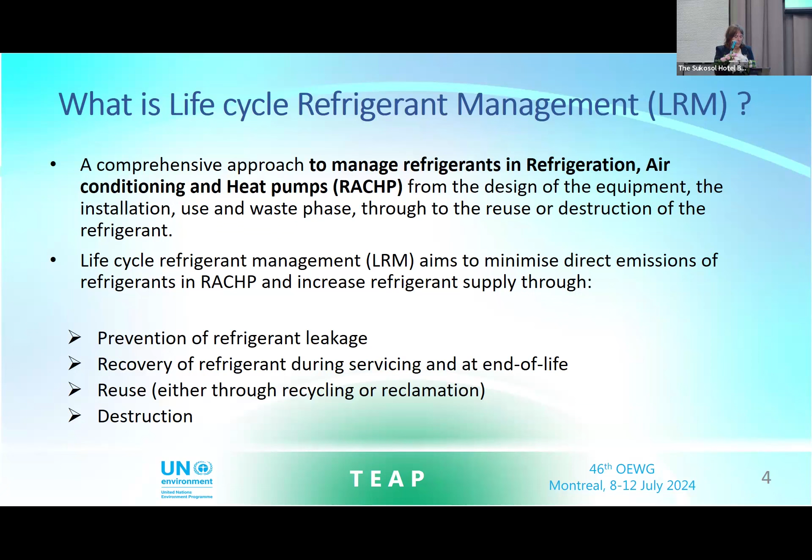through 4 sets of measures. First of all, the prevention of refrigerant leakage. Secondly, the recovery of refrigerant during servicing and end of life. Thirdly, the reuse, either through recycling or reclamation. And finally, destruction. So let me take you through these 4 topics one by one.

Leak prevention first. Leak prevention focuses on the measures to avoid refrigerant loss during the whole RAC HP life cycle, which of course has climate, ozone, and other environmental, health and safety benefits. It also provides energy savings by maintaining the performance of the RAC HP equipment. Leak prevention requires a variety of preventive actions already during the original design of the equipment, the manufacturing process, the transport, storage, installation, use, and end-of-life treatment.

There are a lot of international standards and other guidelines, including national ones, that provide recommendations in this regard, and you can find several of them in the report. Examples are standards that identify the selection of suitable materials, such as components, joints, and packaging, training requirements, and also tightness inspections to verify that the refrigerant indeed is not leaking.

And for tightness inspections in particular, there are two major groups of methods that are being used in the market. The direct methods, as we call them, these are by use of sensors or substances like UV dyes or acoustic cameras. And indirect methods, they are focusing on analyzing the performance parameters of the RACHP equipment, such as the pressure or the temperature, for example.

Leak tightness inspection has to be achieved through comprehensive training of the technicians, of course, the accessibility to those leak detection equipment, and policies that promote this regular inspection and repair. Leak detection technologies are available, but the report identified that they are not always accessible in Article 5 parties, and examples of supporting policies are provided in Chapter 5.

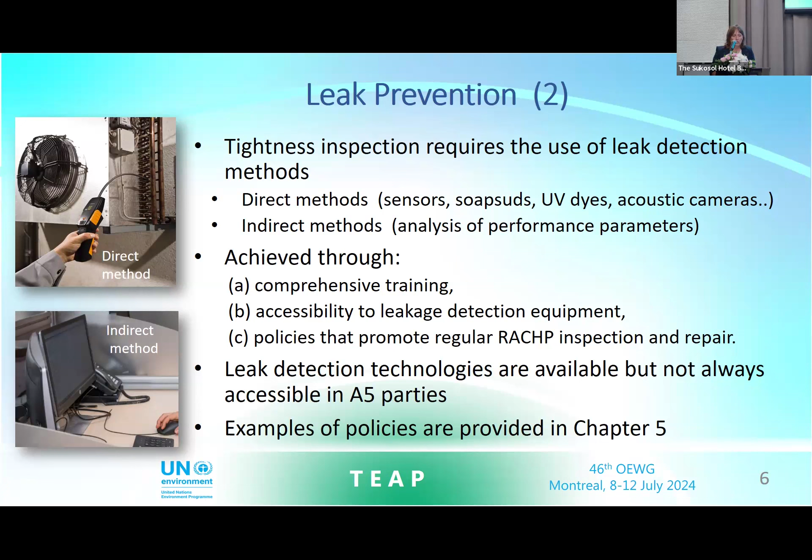Focusing on refrigerant recovery, I think all of you in the room know this very well. It refers to the recovery of the refrigerant from the RACHP equipment, also from refrigerant cylinders, during the servicing or the disposal. There are off-the-shelf recovery tools. I think some of them are promoted here in the room. There are also custom-made recovery technologies that are available, but again, not always accessible in Article 5 parties.

Refrigerant recovery is, of course, essential. Otherwise, recycling, reclamation, or destruction could not take place. But it remains low in both Article 5 and non-Article 5 parties. It really requires a change in behavior to stop venting to the atmosphere through comprehensive and continued technician training, access to refrigerant recovery machines, establishing also a logistic reverse supply chain with sufficient access to refrigerant recovery cylinders and tanks. That should really not be underestimated. There's a need for sufficient technician time to complete the recovery and financial mechanisms to support this responsible recovery.

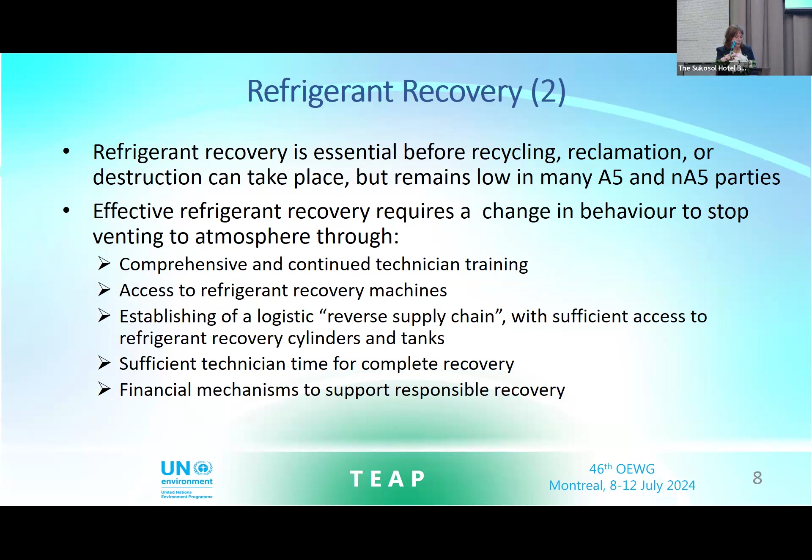Refrigerant that is recovered can further be reused by either recycling or reclamation. And to determine whether a recovered refrigerant can be reused and where, it may be necessary to conduct a chemical analysis to know its composition. But in some cases, the reuse may occur immediately without prior treatment. Refrigerant reuse is very interesting as it does not count to Montreal Protocol consumption targets and therefore can contribute to compliance. Both recycling and reclamation support the circular economy by reducing the need to produce new refrigerants.

And incentives for recovery and reuse are highly sensitive to the size and accessibility of the bank of refrigerant in RACHP systems, the regulatory environment, availability of alternative technologies, and to the price of virgin refrigerants. In particular, if you have a phase-out or phase-down regime that creates a shortage of refrigerant and leads to price increases, then refrigerant recovery and reuse may increase because it's economically more interesting. However, if the supply of newly produced or virgin refrigerant remains plentiful, then the reused refrigerant may be non-competitive and other policy and economic measures may be required to incentivize LRM.

What is refrigerant recycling and how is it different from refrigerant reclamation? Refrigerant recycling is a basic cleaning process such as filtering and drying. It often occurs on site and is most suitable for single component refrigerants. And in the picture, you see an example of a recycling machine for 134a in the car industry.

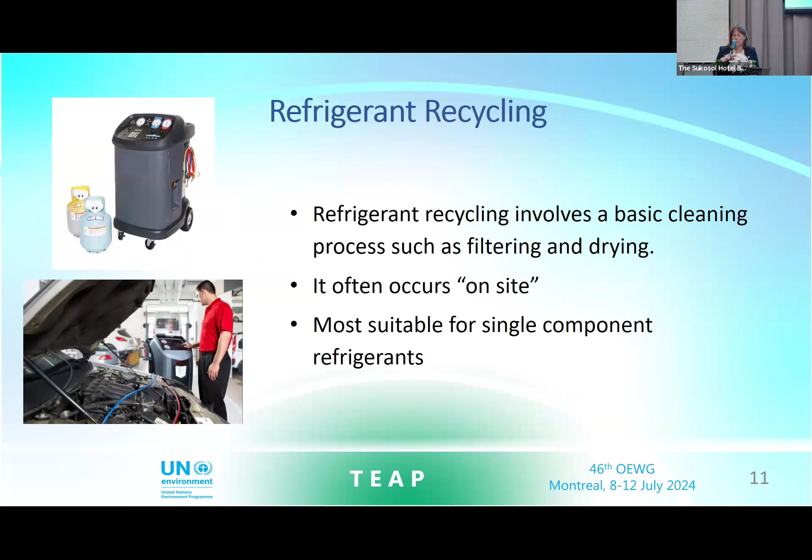It was mentioned already this morning, some recovered refrigerants need to be destroyed because they may be highly contaminated or there's no further market need. The Montreal Protocol has established a list of approved destruction methodologies. This is mainly for the purpose of production data reporting. It was found that there is actually adequate global capacity for destruction, but it is unevenly distributed between non-Article 5 and Article 5 parties, and even between Article 5 parties. It can be anticipated that destruction technology may further improve in cost, scalability, mobility, and efficiency.

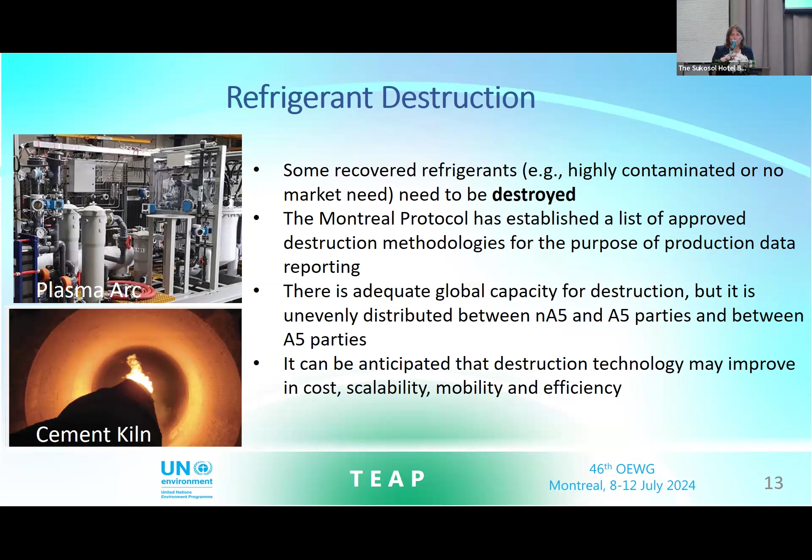Then a few words on the costs of LRM. It requires substantial investment for the acquisition and operation of leak detection, recovery, recycling, reclamation, and destruction. It depends on the type of refrigerant, the scale of the operation, regional regulations, the technology used, and the fate of the recovered refrigerant. Will it be reused or will it be destroyed?

Recovery and recycling is relatively simple and dispersed over many places. To be effective, you need, though, a large amount of recovery and recycling equipment. Equipment for destruction and reclamation is more sophisticated. It can be capital intensive and is more centralized. Costs include capital, variable costs, such as labor, and opportunity costs.

For example, an installer may gain more money if he goes to install a new RACHP equipment rather than spend his time on recovery of a refrigerant. And that's what we call the opportunity cost. Is it really opportune for him to do that work or not? Variable costs are determined by the volumes of the refrigerant being recovered and reused.

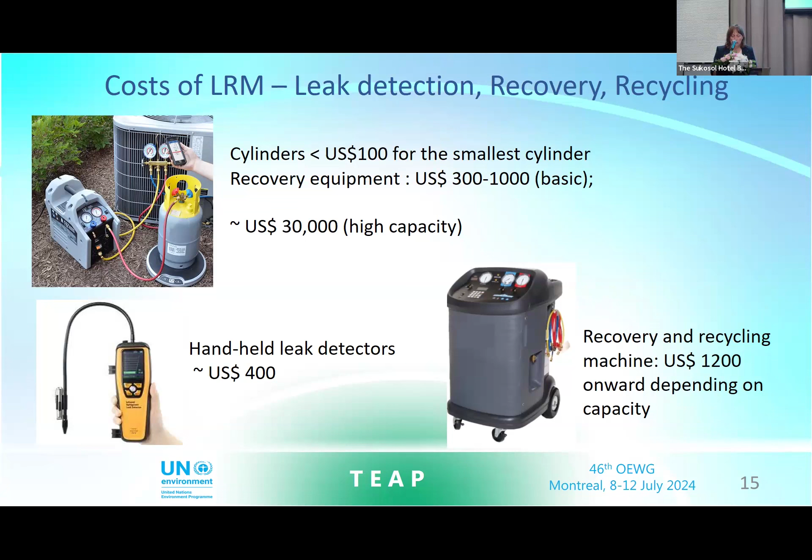Recovery equipment between 300 and 1,000 for basic recovery equipment. But if you go to higher capacity, it can be up to $30,000. Handheld leak detectors, about 400 was the indication. Recovery and recycling machines, 1,200, but depending on the capacity, it could also go up. Refrigerant identifiers, I think some of them are also featured here in the room, between 1,000 and 5,000 US.

Gas chromatography, which is a very expensive solution, was indicated at 45,000. Some parties said it's much more in their country. And reclamation units could be from $5,000 onwards, also again, depending on the capacity. Retrofitting existing hazardous waste facilities, such as the rotary kilns, which was mentioned this morning, can be a cost between $50,000 and $100,000. A new dedicated facility, like a small rotary kiln, $3 million. Commercial plasma arc facilities, $4.2 million.

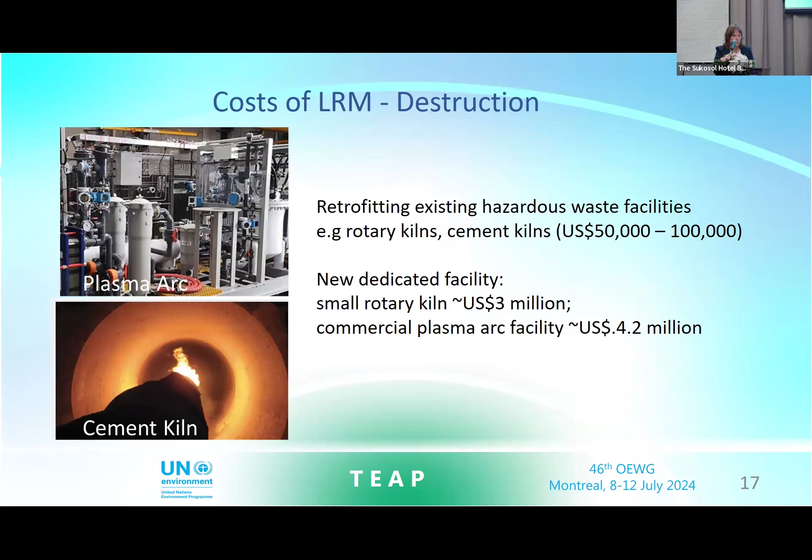A few words on policies and programs. Both mandatory and voluntary LRM policies and programs are currently implemented in many parties already. Many lessons have been learned from the varying success of these policies and programs. It has been identified that policy enforcement is challenging due to the large volume of end users, distributors, and independent contractors that are involved. Effective LRM requires stakeholder support, particularly when developing reverse supply chain infrastructure and technician training.

Voluntary actions, compliance, offset generation, incentivization, and corporate citizenship programs can also be very helpful. And the safe handling and transportation of refrigerants must also be considered, in particular when we are moving more to flammable refrigerants in the future.

Article 5 parties, and especially low volume consuming parties, lack or have inadequate LRM infrastructure. And we are talking here again about leak detection equipment, recovery and recycling equipment, and the associated tools, the access to reclamation and destruction units, analysis laboratories, expertise, and logistics to effectively manage the reused refrigerants.

While some larger industrial Article 5 parties may have more developed infrastructure, they often also require upgrades or replacements for their existing tools and equipment to improve LRM. And significant benefits could arise from Article 5 parties working together. It was also mentioned this morning, the regional cooperation to set up capital-intensive integrated reclamation and destruction infrastructure.

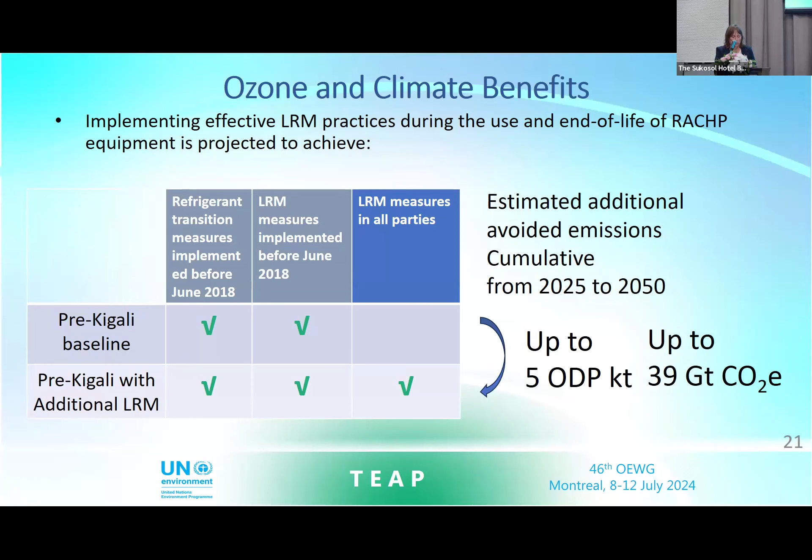So in conclusions, for the report, technologies were found to be available for LRM, but not accessible in all Article 5 parties. There are policy, economic, and accessibility obstacles and challenges associated with effective LRM. And it was also found that if you have a phase-out or phase-down regime that creates a shortage of refrigerant and leads to price increases, then refrigerant recovery may increase. However, if that's not the case, you will need other policy and economic measures to support LRM.

Both mandatory and voluntary policies and programs were currently implemented in many parties already with varying levels of effectiveness. It was also found that establishing a data collection system by parties could inform their decision-making for optimal LRM strategies. And it was not possible in the time frame of the report to make a more deep cost-effectiveness analysis of LRM.

LRM practices can be a key component of refrigerant emission reductions. I think that's also quite well known to you. It can achieve emission reductions beyond those from strictly Kigali compliance. It may be even the key tool for some parties to achieve Kigali compliance. The TEAP will continue to follow these issues and its potential emission reduction opportunities. And with that, I thank you for your attention.

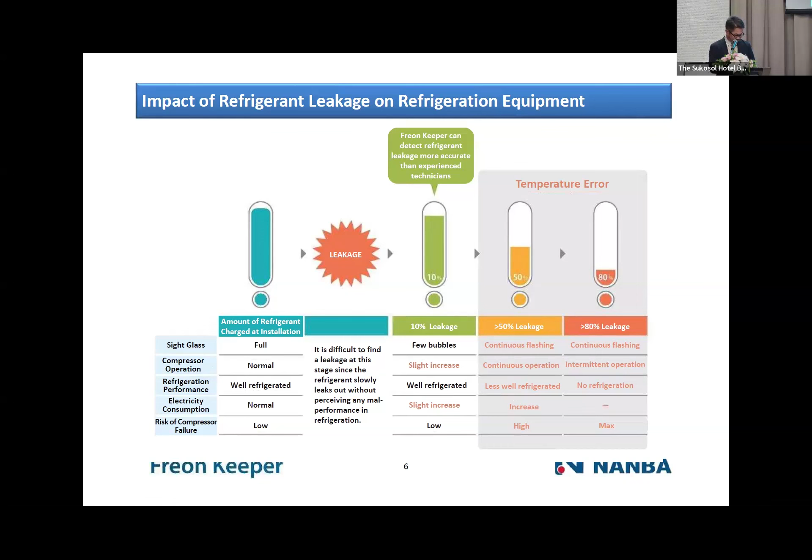This slide explains how the Freon Keeper detects refrigerant leaks. When the amount of fluorocarbon refrigerant is reduced, refrigerant gas cannot be fully turned into liquid status due to poor condensation in the cycle. This remaining gas is called flash gas. This photo shows a sight glass attached to the refrigerator, which is an inspection window to visually check the flash gas.

Picture A is when the optimal amount of fluorocarbon refrigerant is filled. No flash gas is observed because fully liquid refrigerant is passing through the sight glass. Photo B is when a small leakage has occurred, so a drop of bubbles can be seen. Finally, picture C is when more than 50% of the refrigerant is leaking, and you can see many bubbles forming.

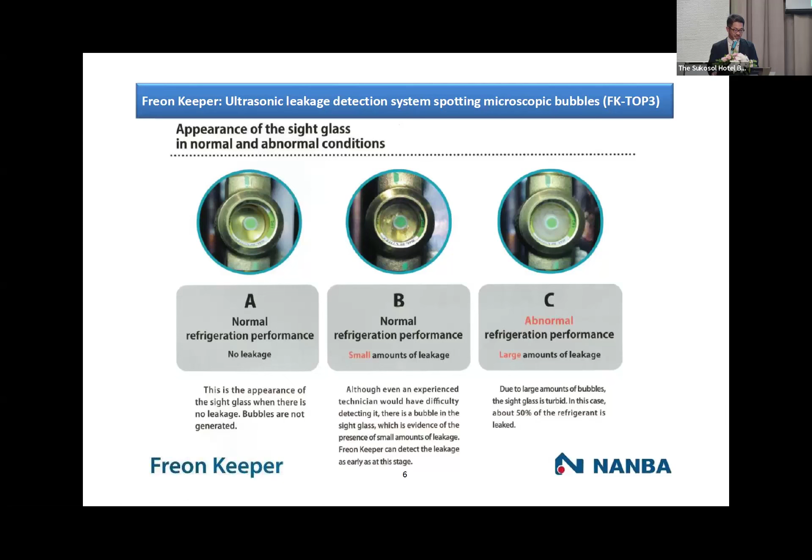Freon Keeper has three benefits. The first one is cost reduction. Freon Keeper can significantly reduce power consumption and the recharge cost of refrigerant.

The second is to reduce fluorocarbon refrigerant leakage. This means Freon Keeper contributes to mitigating global warming by preventing the emission of fluorocarbons, which have a high global warming potential.

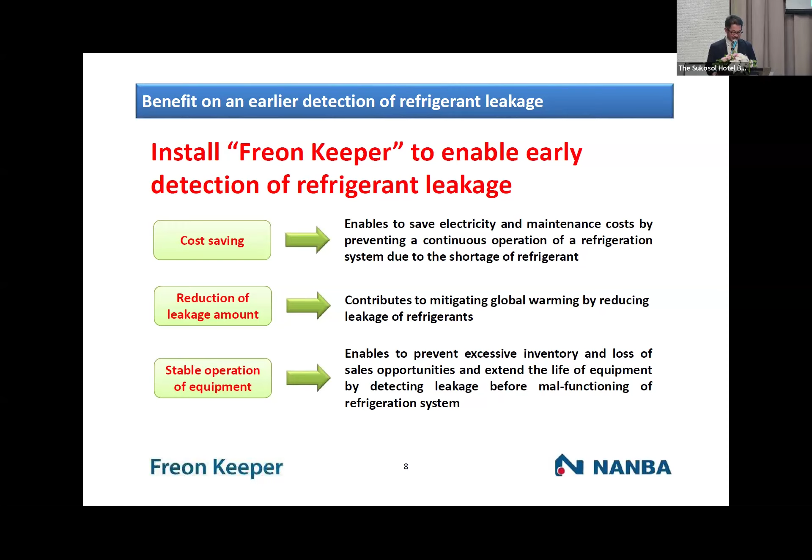Freon Keeper turns refrigeration equipment into IoT. Various sensors are installed in the equipment, and operational cost and operational data is sent to the server using Wi-Fi. Data from the server can be checked on PCs around the world, allowing centralized management of equipment at each location.

Freon Keeper can determine refrigerant leakage based...

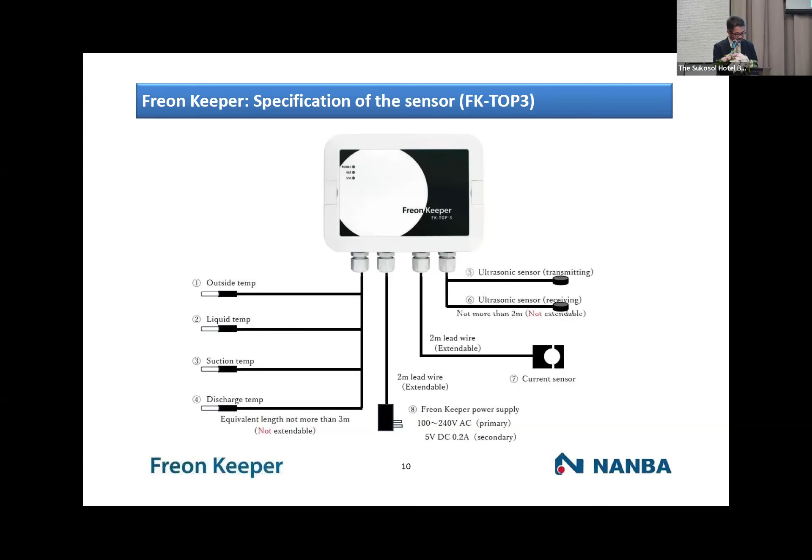In 2018, NANBA carried out the installation test of Freon Keeper in Malaysia with the support of NEDO of Japan. So I'd like to introduce the test result briefly.

In this case, Freon Keeper was installed on a chiller system for air conditioning in a shopping mall in Malaysia. Three chillers were installed, and two of them, number 1 and number 3, were in operation. Each chiller had three compressors.

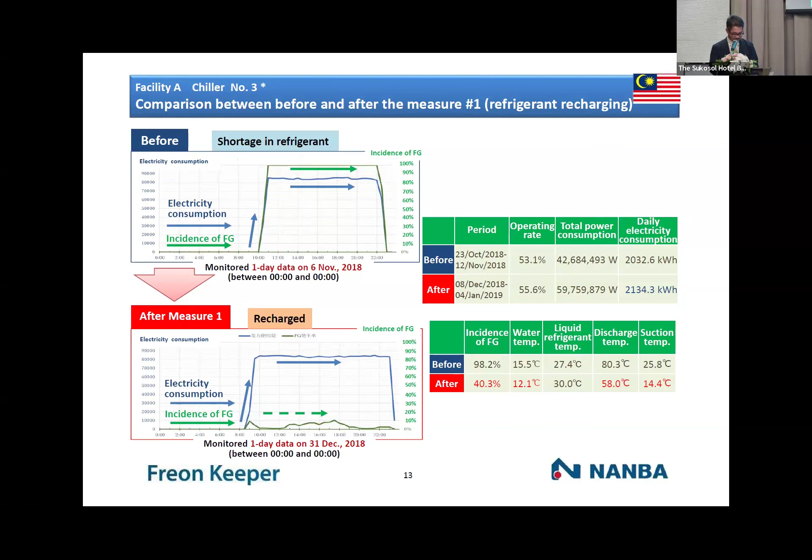Also, the flash gas generation rate was not zero, which means the amount of refrigerant was not enough. Therefore, it was decided to take a second measure to reduce the number of operated compressors from 3 to 2. The result is shown in the lower graph.

The flash gas rate further settled down. In the data, the flash gas generation rate was reduced from 40% to 4%, and the electricity consumption was lowered from 2,130 to 1,300 kilowatt-hour. Moreover, the water temperature increased only 1 degree.

Compared to before the installation of the Freon Keeper, the capacity has increased and the amount of electricity has decreased. In addition, the amount of refrigerant was close to adequate by operating two compressors as a result.

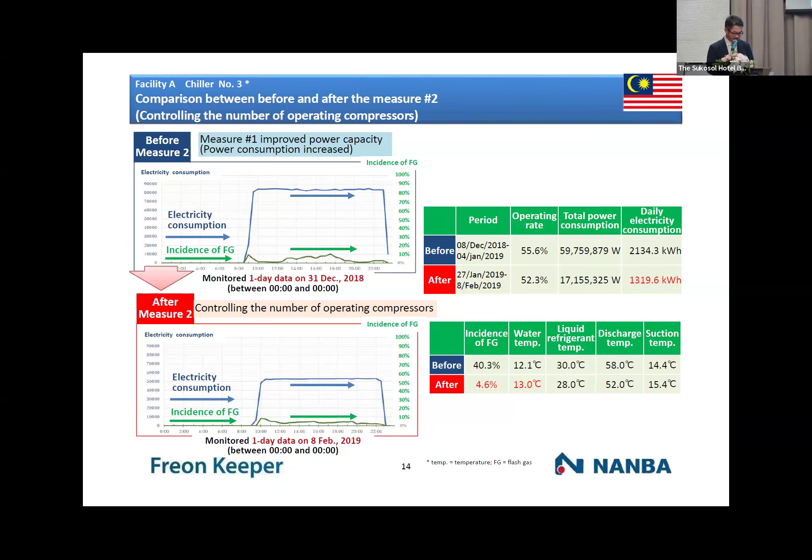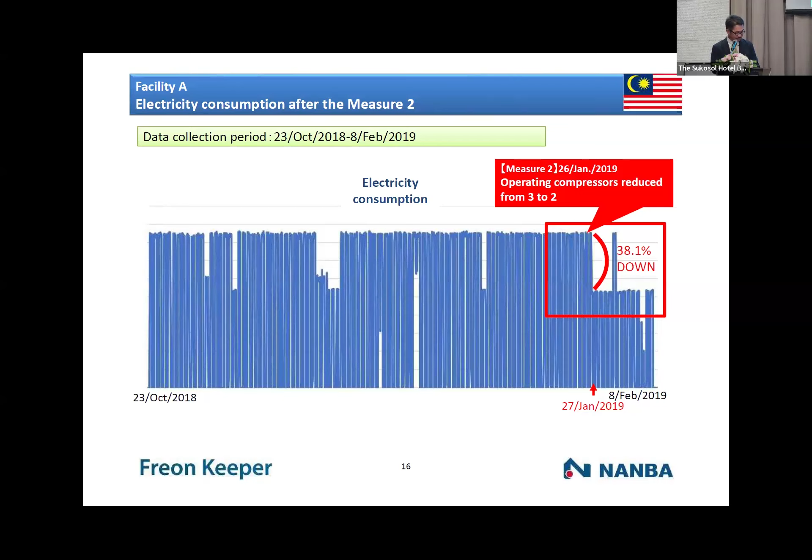Here's a graph of electricity consumption for the same period. A red box indicates the result of second measures, which shows 38% reduction in electricity. In conclusion, the water temperature in number 3 chiller, where measures were taken, fell from 15.5 degrees to 13 degrees. Even in number 1, where no measures were taken, the water temperature dropped from 15.7 degrees to 13.7 degrees consequently. As a result, the amount of electricity used in number 3 chiller was reduced by 38%.

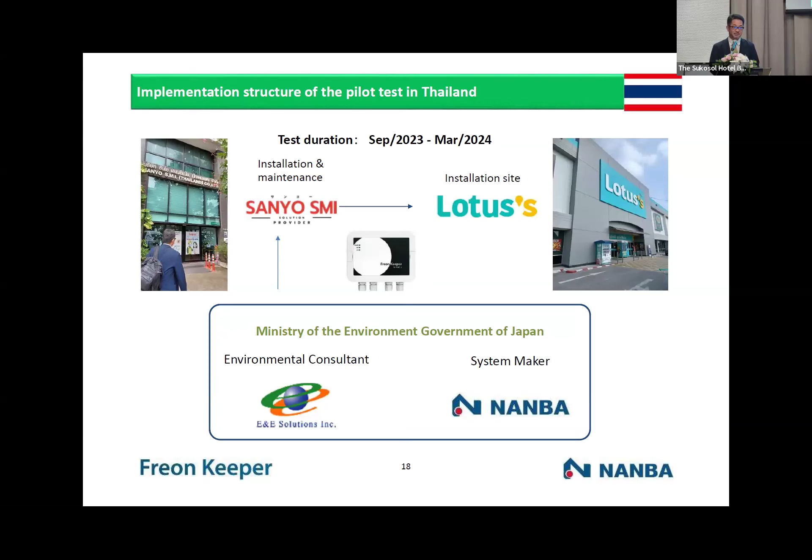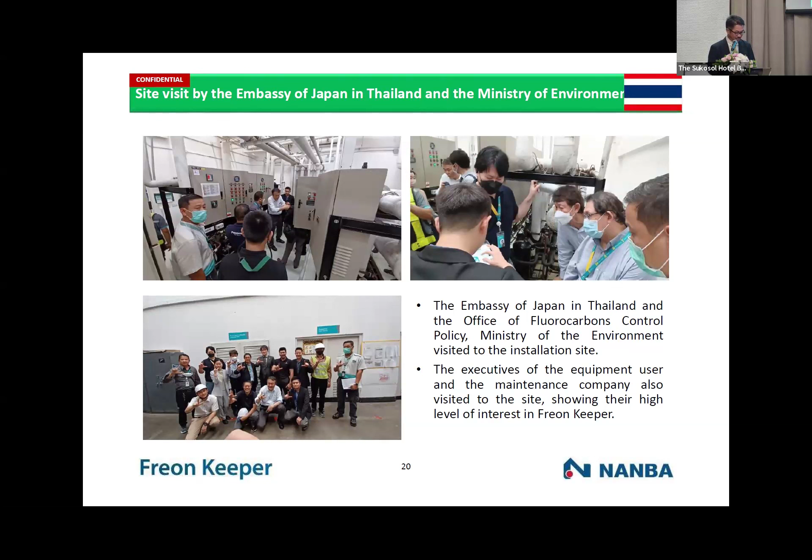This shows when the Japanese embassy in Thailand and the MOE's Fluorocarbon Control Policy Office visited the installation site. The executives of the equipment users and the maintenance company also visited the site. And they showed a high level of interest in Freon Keepers.

However, the users and maintenance companies have highly appreciated how Freon Keeper can effectively provide data on the operating conditions and malfunction of the refrigeration unit. Moreover, the test reveals the high level of Sanyo SMI's technical capabilities.

In summary, first of all, the increased electricity due to fluorocarbon refrigerant leakage is not well recognized, but its energy reduction effect is very significant. Secondly, it is too late to repair the equipment after it has stopped cooling. Maintaining the proper amount of refrigerant can extend the life of the equipment instead of being messed up by unexpected repairs. Repairs are easily scheduled and prevent inventory losses and lost selling opportunities.

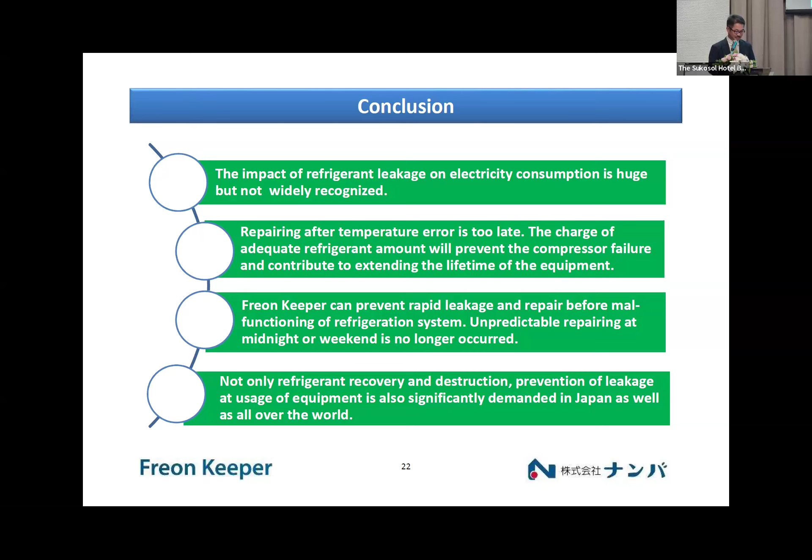Finally, from the viewpoint of climate change, preventing leakage of fluorocarbon refrigerant during use of equipment should be seriously addressed, taking into account its significant reduction effect. Okay. Thank you very much.

That was fantastic. Thank you very much. Very interesting presentation. Great country examples. Hopefully we'll have a chance to have a little bit of discussion about this at the conclusion of the presentations. But without further ado, I would like to invite up Mr. Akira Mizuhara and Mr. Hirotaka Hata, or whichever one of you is giving the presentation, on technologies for reclamation of used refrigerants. Thank you very much.

Nice to meet you, everyone. My name is Hata from MZ Company Limited, a Japanese company. I'm going to talk about technologies for reclamation of used refrigerants.

The first topic is which refrigerant is suitable for reclamation. Refrigerant recovered from cooling equipment can be reclaimed by achieving the same quality as new refrigerant and refilling other refrigerators, air conditioners, and other equipment. Oil and moisture mixed in refrigerant are removed after reclaiming. Different refrigerants are difficult to separate and extract, and if a significant amount is mixed, the refrigerant must be discarded.

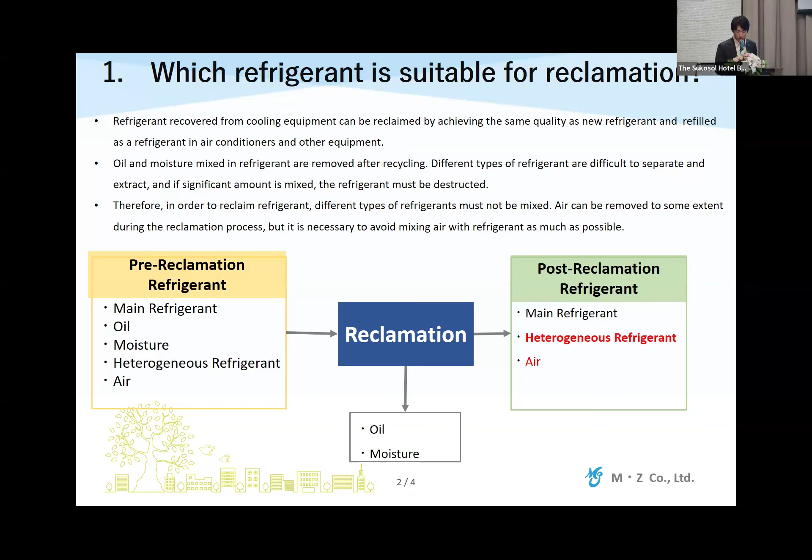Therefore, in order to reclaim refrigerant, different types of refrigerant must not be mixed. Air can be removed to some extent during the reclamation process, but it is necessary to avoid mixing air with refrigerant as much as possible.

The second topic is what to do before recovering refrigerant. A very important point: before recovering the refrigerant, the recovery cylinder must be sufficiently vacuumed. It is also necessary to self-clean the recovery machine and completely discharge the refrigerant remaining in the condenser inside the recovery machine. Also, this is usually done when the previous recovery operation is completed.

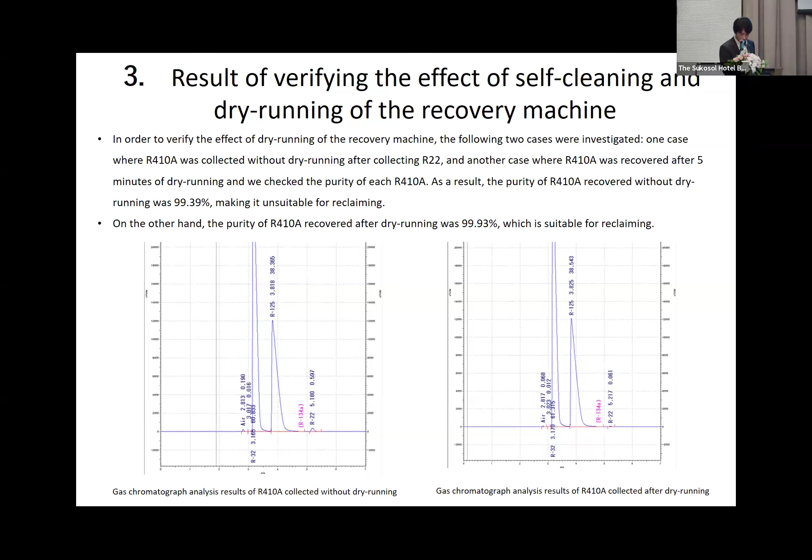The last topic is an explanation of how to reclaim refrigerant. Introduced is the method of reclaiming refrigerant the MZ group is doing in Japan. Refrigerant for reclamation is recovered in a cylinder of about 120 liters and reclaimed.

First of all, refrigerant is liquid in the cylinder and evaporated when heated. Next, the oil mist contained in the gas is removed by the oil absorbent. Then moisture and acid are removed by moisture absorbent and acid absorbent.

Last, the refrigerant gas from which impurities have been removed is cooled and liquefied to become recovered refrigerant. Detailed information is on display, so please come to take a look.

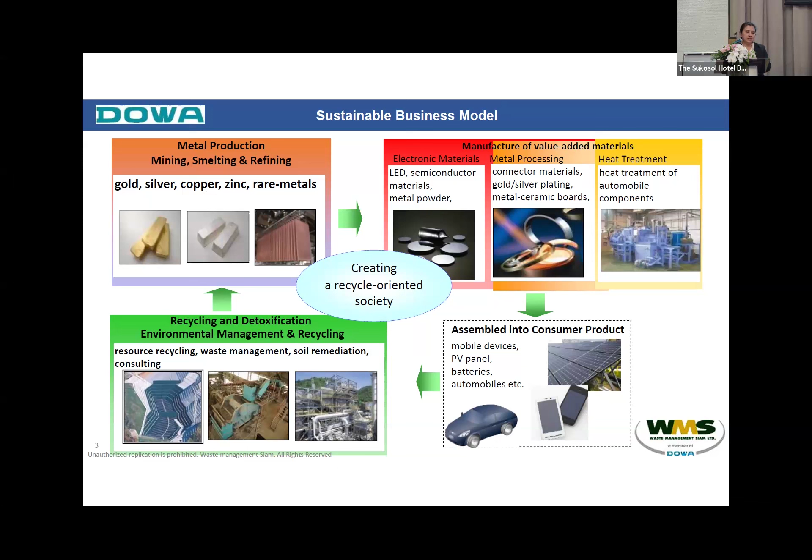Then, for the end of life, we also have our company, DOWA Eco-System, that does recycling, and we have waste disposal for things that cannot be recycled anymore, and a soil remediation business as well. Our company has a global environmental mining and recycling business in more than 80 countries for both DOWA Eco-System and E&E Solutions.

Thailand has much more than other countries. Some other countries have only 1 facility, but in Thailand we have 4 companies and 5 facilities. DOWA Eco-System has 4 core businesses: recycling, waste management, soil remediation, and we also run our own fleet, a domestic logistics company, so we can control the quality of transportation and serve the customer the best.

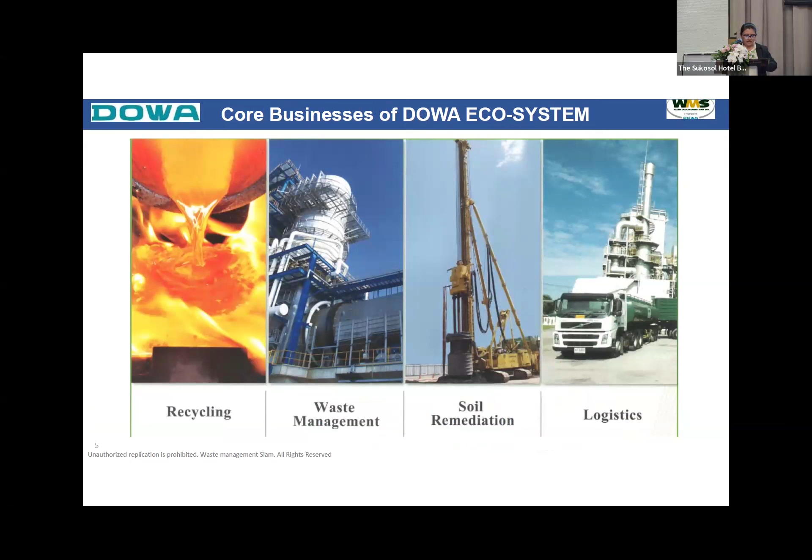Here, let me introduce the Thailand operation under the Waste Management Siam facility in Thailand. First, here we see the Bangpoo Environmental Complex. This is the incineration that can burn both hazardous and non-hazardous solid, liquid, and also gas waste. We also produce steam that we can sell to other factories nearby, and we can also produce electricity with steam turbine generation as well.

And we have another incinerator, a furnace that we installed later for the pre-treatment of batteries before we segregate the metal and precious metal, which we can send back to Japan for recycling. That's for lithium batteries and nickel metal hydride batteries for hybrid and also EV vehicles.

And we have the SBEC. SBEC here is the landfill. We have a secure landfill. For the landfill, we treat only non-hazardous, but we can also treat hazardous waste as alternative raw material for the cement kiln. And we have the wastewater treatment plant, and we also do the WEEE dismantling project in our facility in Chonburi.

And we also have transfer stations all over Thailand, because our customers are located from the north to the south of Thailand. Because of that, we run our own transportation to make sure that we can control the quality of the service to our customers.

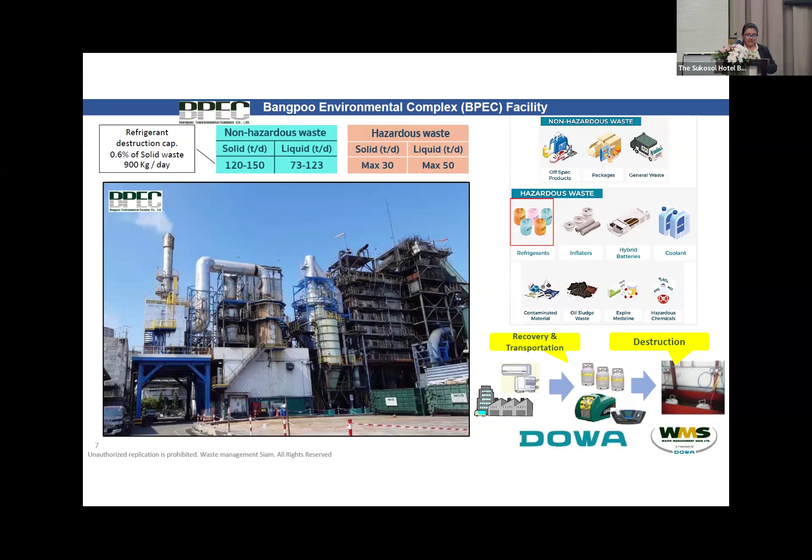For the technology of the main furnace, we use fluidized bed technology, because we can save energy with it, and we feed the refrigerant and the gas waste into the main furnace together with the hazardous and non-hazardous waste. Then we have the full flue gas treatment system. And at the end of the pipe by the stack, we have a 24-hour monitoring system connected with the Industrial Estate Authority of Thailand, so they can monitor our flue gas treatment system.

In Thailand, I can say that BPEC is the one and only facility that can treat gas waste and check the destruction removal efficiency. Before we got the permit, we had to do a trial, and for the trial, we had to destroy more than 99.99% of the refrigerant. So we are the only one that can make sure every customer that sends their refrigerant to us can have the certification, and we can check the quality of the gas treatment, that we treat 99.99%.

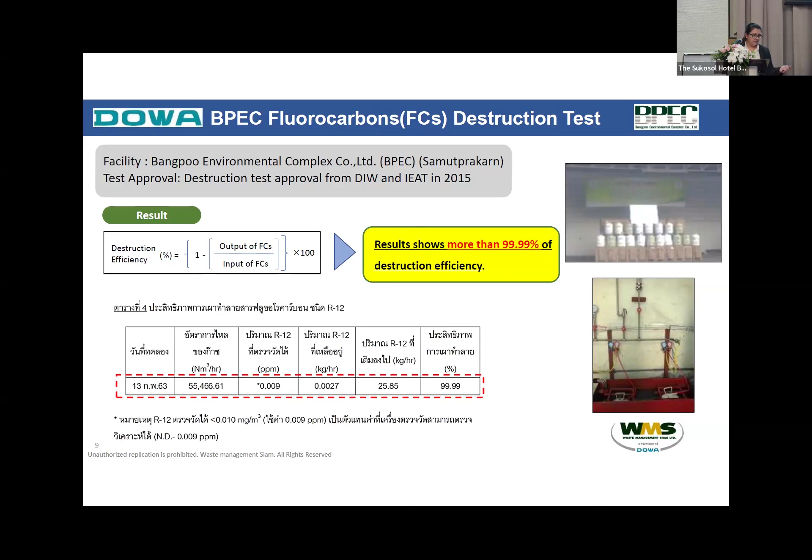And this is the way that we do it. We have both factory and non-factory. Actually, most of the factories that have refrigerant are our customers already. Then we have the recovery. We do not do the recovery ourselves. We have a partner that does the recovery at our customer's factory, and then we have our own fleet transportation to bring that gas waste to our site, and we do the destruction here at BPEC. Currently we can treat more than 100 tons per year as of last year.

Apart from that, we also have some other activities. We do recovery technique demonstrations. We do some PR activities because we would like to bring awareness to our society, for factories and non-factories as well, of how important it is to treat freon, to treat refrigerant properly.

We also did a destruction for the customs department. In Thailand, they seized illegally imported refrigerant and kept it at the customs department for more than 10 years. It was more than 100 tons. And then we disposed of it. Early this year, we just finished that.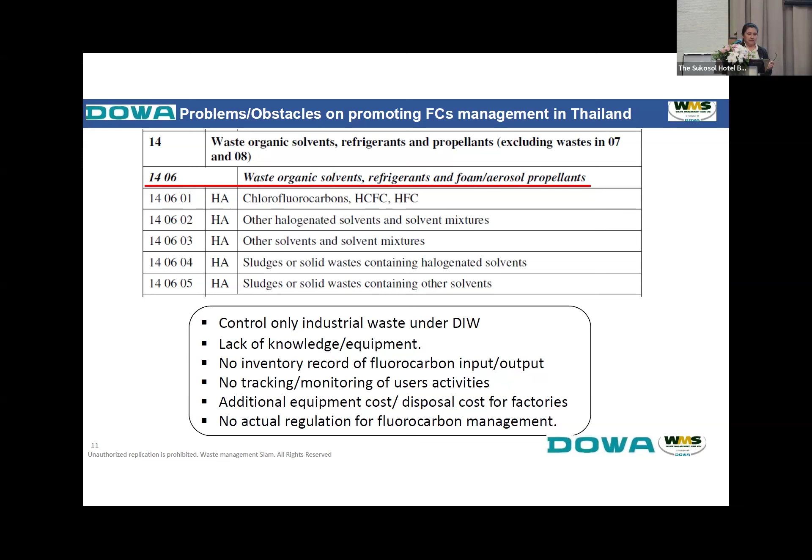Yeah, I think I already presented that for the factory. Most of the factories are already our customers, and this is controlled by the Ministry of Industry because there is already a waste code. But for the non-factory, there are two ministries taking care of that: the Ministry of Public Health and the Ministry of Natural Resources and Environment.

And now they try to put the refrigerant in the system, but it is still in the working process. There is no solid plan yet. We have been working on this for many years, since we got support from MOEJ and E&E Solution, on how we are going to develop the management of CFC and refrigerant in Thailand.

And we work very hard, jumping from one department, one ministry to another ministry. We try to get collaboration between government sections, and we hope that soon everything is going to happen, and Thailand should have some solid plan to manage the refrigerant.

And apart from that, we also have some activities with the government, like the Pollution Control Department, with the Ministry of Natural Resources and Environment. We do some WEEE collecting, dismantling, and also recycling. And we know that WEEE means air conditioning as well, and there is some refrigerant still kept inside.

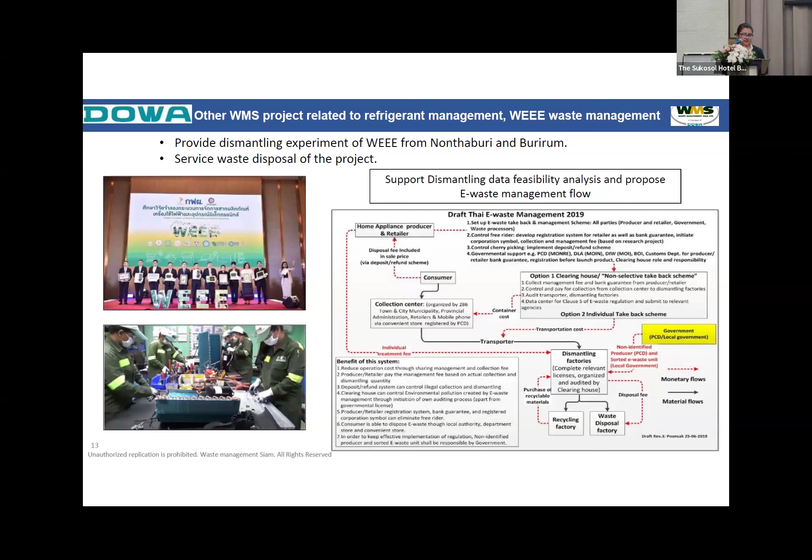Apart from that, I heard earlier that we talked about ELV as well, end-of-life vehicles. As you know, we try to collaborate with many sectors. One of the sectors is the automobile companies. We collaborate with the Toyota Tsusho Group on ELV management. Toyota also has its own group company that does the dismantling, and in the ELV there is some refrigerant left in the air conditioner, and also liquid hazardous waste.

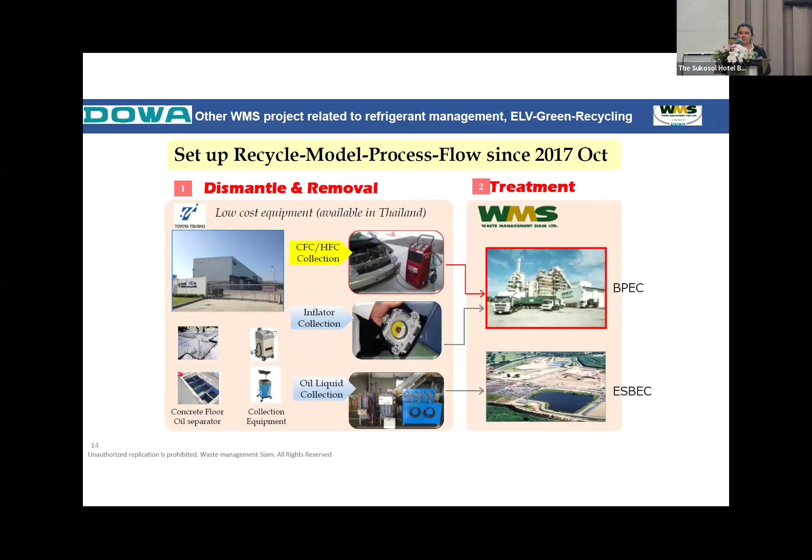So after the dismantling at the facility, the liquid waste is sent to our facility in Chonburi, and the freon, the gas waste, is sent to BPEC for destruction. We have worked on ELV since 2017, but it still has not happened yet. We still have to work on it more and more.

And this is an example of the project that we did with EGAT, the Electricity Generating Authority of Thailand. We did the model project with EGAT and also HomePro. HomePro is the department store that sells home appliances. So in the process framework, they launched 375 machines for the refrigerant of the air conditioner. They announced that if you have an old air conditioner, you can register in the system to trade it, old to new.

And when you register and they accept, they will send this company, Daikin, which has the FC recovery team. If they accept, you buy the new air conditioner at a HomePro store, and then this team will come to your home, recover the FC, the refrigerant in your old air conditioner, and then install the new one.

The old one goes back to their warehouse, and the air conditioner itself is sent to our facility for dismantling, and the refrigerant is sent for destruction at our facility in BPEC. So this is the closed loop, and this project is already in place. I heard that some department stores like Power Buy are also trying to create this kind of activity as well.

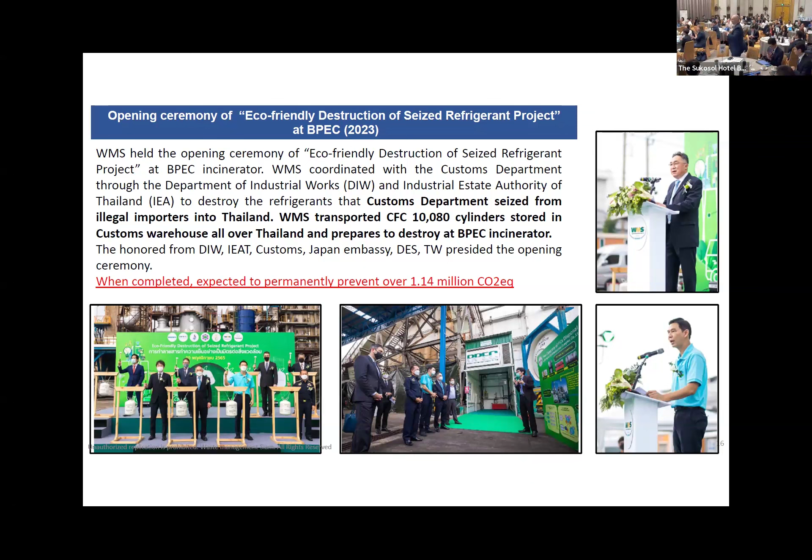Thank you. Thank you so much. So we have time now for maybe 2 questions before we move to the next session. For any of the speakers?

And at the bottom, you said there's still no direct refrigerant control and regulation for each sector. Are you talking about end of life, or in general? Because in general, there's control in terms of import, and also there's a ban in certain sectors for certain kinds of chemicals, including CFCs. So could you elaborate on that?

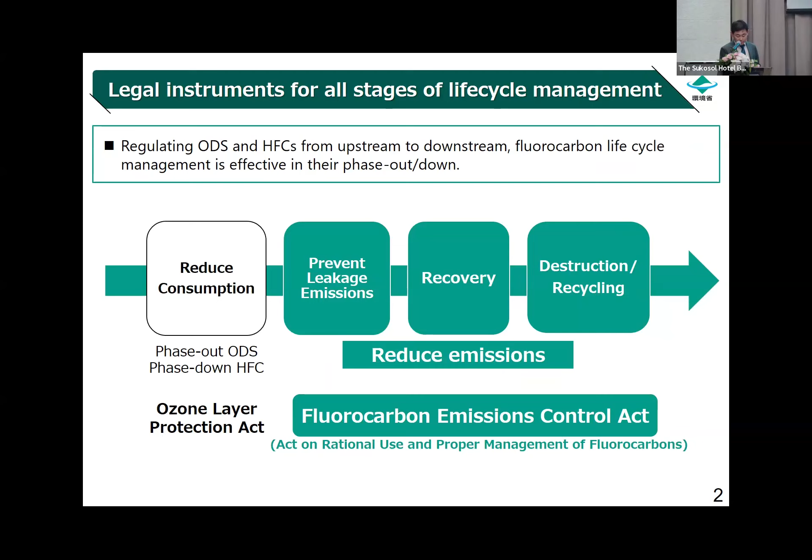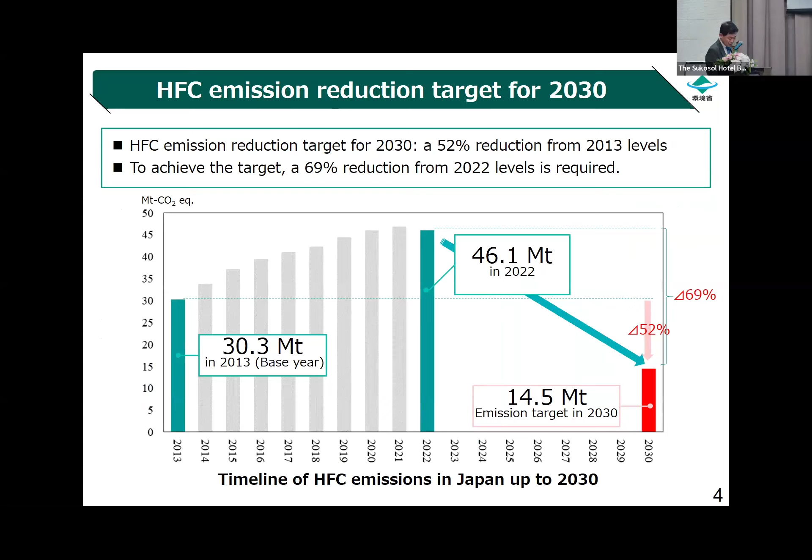Furthermore, we have an HFC emission reduction goal toward 2030. This goal is part of the global warming countermeasure plan based on the NDC and the Paris Agreement, to achieve 52% reduction by 2030 compared to 2013 levels. We believe the life cycle management approach is very effective too.

Let's go back to the current state of HFC emissions. This figure shows a breakdown. HFC emissions account for about 4% of total GHG emissions in Japan, and about 90% of HFC emissions are from the cooling sector. Thus, controlling HFC emissions from cooling plays an important role in reducing HFC emissions and GHG emissions as well.

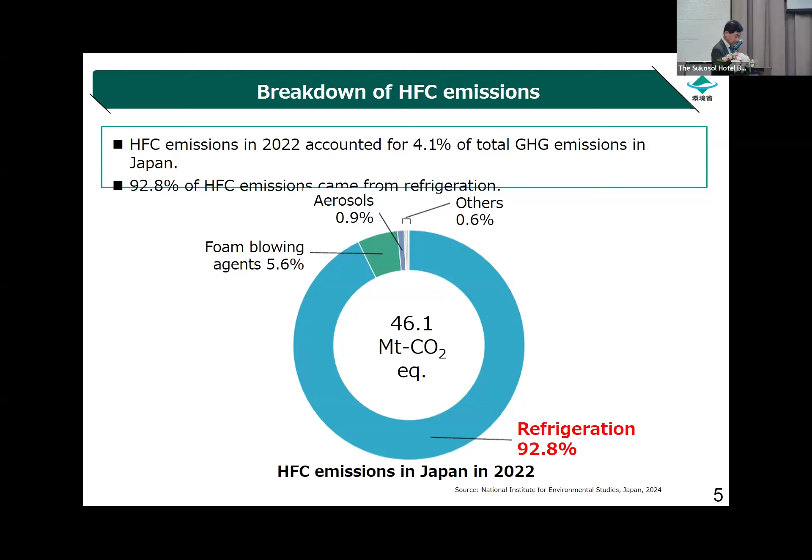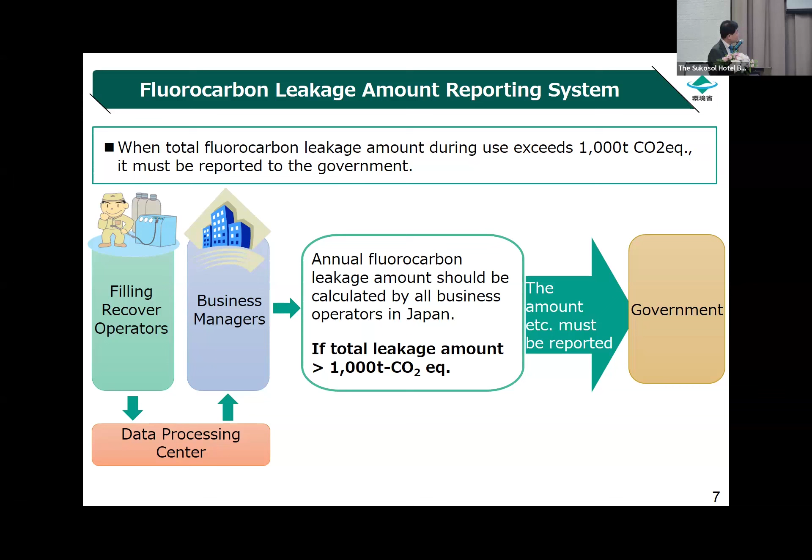Currently, we have approximately 52,000 recovery operators and 56 destruction facilities nationwide.

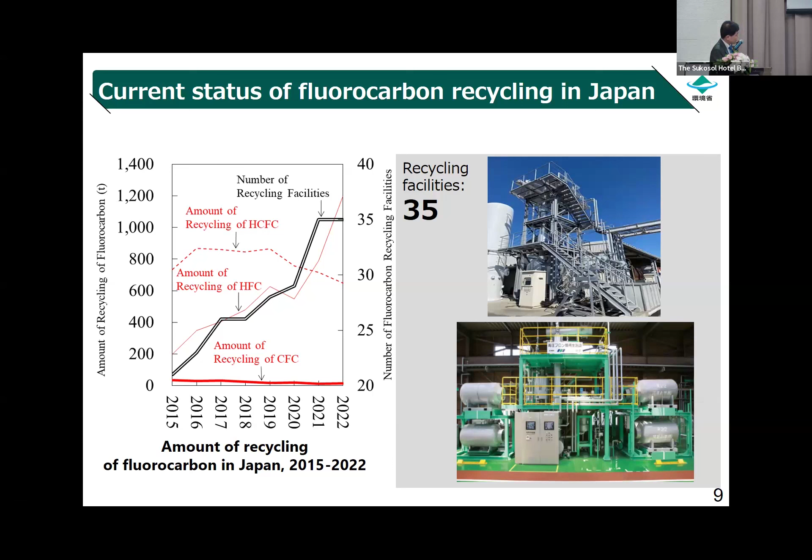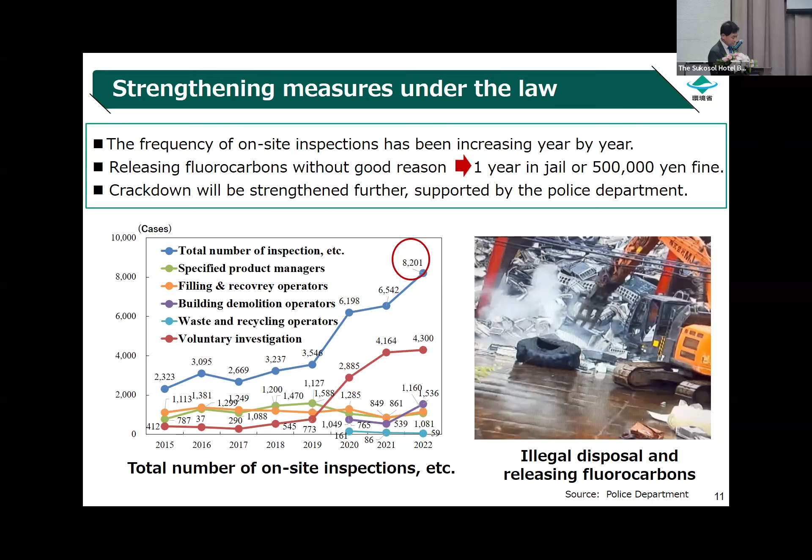We believe our measures and efforts will lead to an increase in recovery rate and reduce emissions further. That's all from me. Thank you very much for your kind attention.

Thank you, Miyake-san. This is one example of the legal system that is operated, especially with a focus on life cycle refrigerant management. Of course, depending on national circumstances, something different can be useful, but still we can learn a lot from Japan's experience. One thing I wanted to share with you from my discussion with my Vietnamese counterparts...

They actually asked us whether the compliance rate in Japan is 100%, and we said no, not 100%, unfortunately. Other colleagues, not Vietnamese but others, asked do we still need the law? Of course, raising the compliance rate is very important. But before that, if you have a law, a legal norm, or clarity for people to follow, you have a standard, a very clear set of required actions.

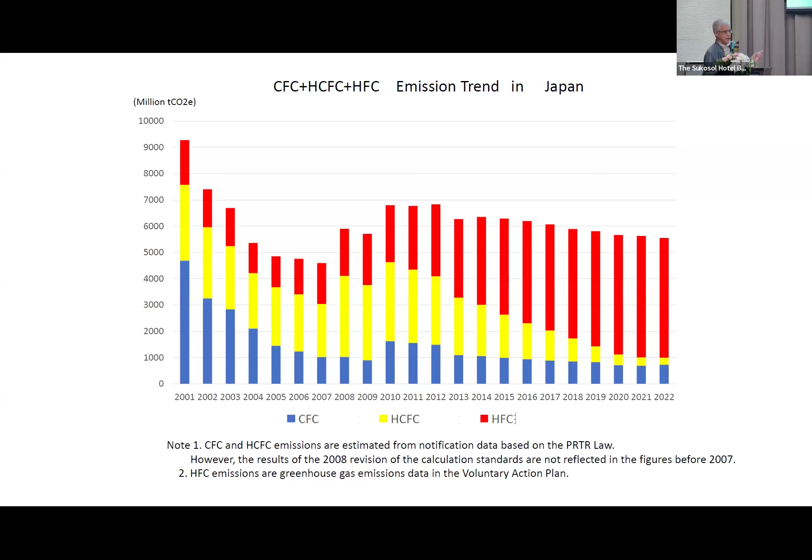This is the emission trend in Japan. It is collected from each operator, each business company, and the data is aggregated at the ministry. After my presentation, Mr. Ashish will explain the reporting system, which makes it easier to calculate emission amounts.

I propose to all countries that this type of destruction amount of fluorocarbons, including CFC and HCFC, be attached to nationally determined contribution reference or additional contribution. These three gases should be treated with the same measures. I think it is very important data. International law has neglected the emission of ODS contribution to global warming for these 30 years. Thank you.

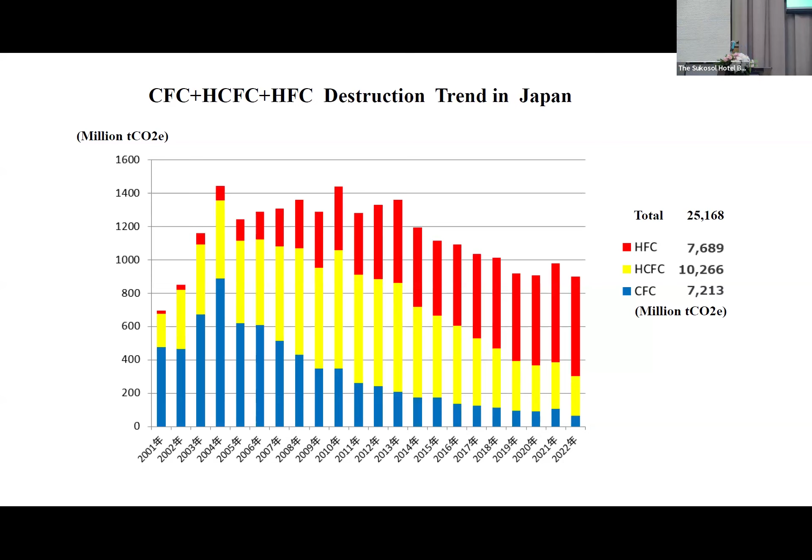Thank you very much. To supplement his point, of course HFC is very important in the context of the Paris Agreement, and we're going to work on that. But to address HFC collection, destruction, and reclamation, we also need to think about ODS, including CFCs and HCFCs, because when you recover and collect, you always have some portion of HCFCs. Also, the economy of the recycling business doesn't only work on HFCs, but also HCFCs, for example. So I think his message is that we need the larger picture of how we're going to address both ODS and HFCs together. That's my interpretation of his comments. Thank you very much, Kasai-san.

Okay, now I would like to start my own presentation, and after that we're going to have a very exciting demonstration of the ODS HFC tracking system. I am going to talk about MRV. I originate from the climate community, so MRV is kind of a common language to us. MRV stands for Measurement, Reporting, Verification, or we call it transparency.

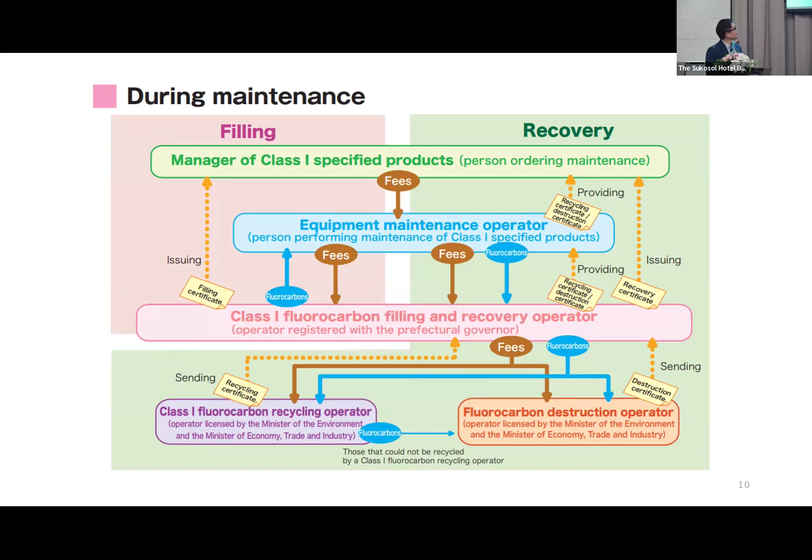And well, this is a very busy one, but actually what the government has is this kind of reporting system electronically. And it's combined with the other reporting system, meaning the greenhouse gas reporting system. But this is very common. And also we have had an energy reporting system for 30 years, but it's combined now. Like this. Sorry.

Okay. So our system has been tested for at least 15 years or something. If you combine it with the other reporting systems, we have 30 or 40 years of history. But this time, we have started something similar in Vietnam. Vietnamese people are very brave in initiating this kind of thing. And as I mentioned, we have started working with the Vietnamese government in developing the legal system.

This is the revised environmental protection law. And here you can look at this. In 2020, they amended the law on environmental protection. That's more like a fundamental law. So you have a very general description that you have to recover, you have to reclaim, you have to destroy refrigerants if you have bigger equipment. That's it. But further than that, they have developed a decree on greenhouse gas mitigation and ozone layer protection. So it has more technical matters on implementation.

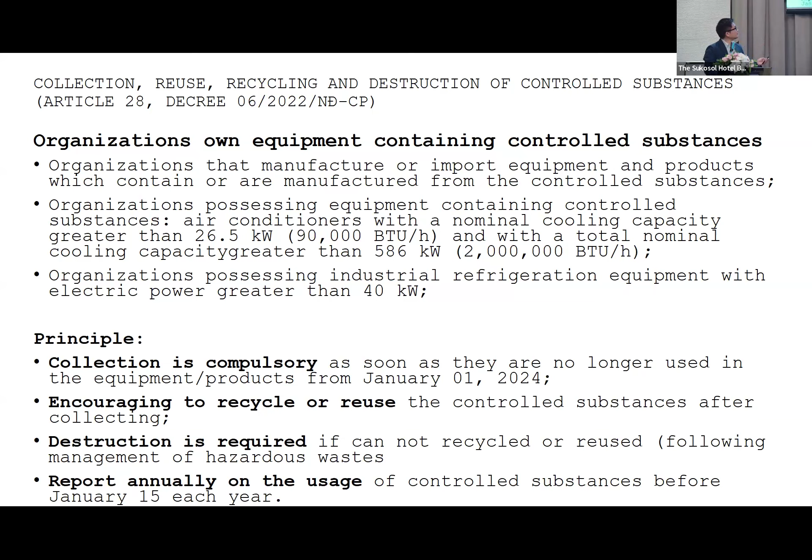Now, I said tracking. So it's similar to what you have worked on. You have recovery from the customer. Some people make a phone call: can you collect my used refrigerant, or can you collect my air conditioner? You don't really want to dump this into the ocean or the mountains. Otherwise, MOEJ will come with the fluorocarbon police and you get arrested. It happened only in one case in Japan. 2 cases already, but it's a terrible case.

But then your contractor will bring a cylinder and they check whether your refrigerant is good enough for reclamation. As Hata-san mentioned, for the moisture content, acidity content, oil content. And even if some refrigerants are good enough for reclamation, I don't think 100% is always reclaimed. At least 10% to 30% maybe are actually contaminated with acidity or those kinds of things. So you really need to divide those which are going to be destroyed and reclaimed.

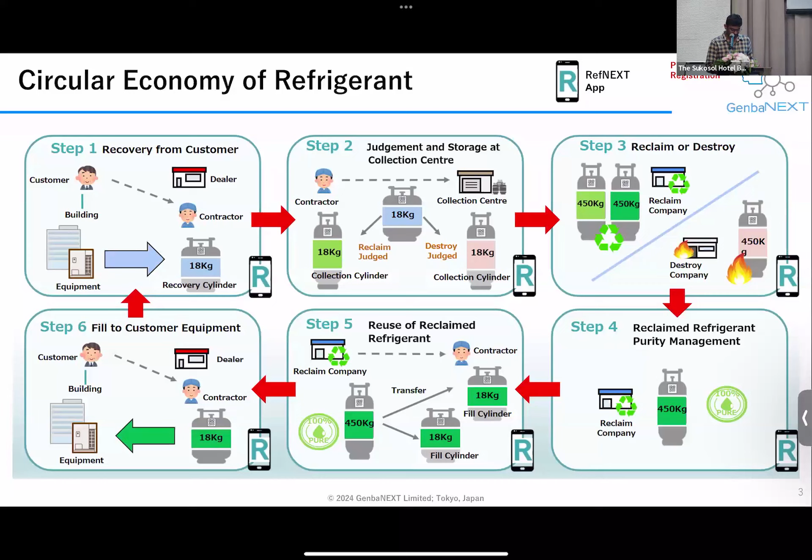So this may all seem to be very complicated at first, but when we break it down into steps, depending on different stakeholders, it becomes rather simple. It's almost like your Amazon app, which I'll just show you. You have 5-6 steps. You just need to loop through that. And then you have automated reports and automated calculations happening. So very quickly, I will take you guys to the actual application.

So this is how the app looks like. This is the web version of the app. I'm using some test accounts here, so please don't quote me on the data later on. So this is basically how the dashboard or the interface looks like. First and foremost, I'd like to highlight the users. As you can see here, you have administrators, dealers, contractors, field engineers, processors, all of them on the same platform. So this is your one-stop shop to know whom you are connected to, who brought in the stuff, to whom this stuff is going to.

Then come the primary jobs that we can correspond on the application. As you can see in the active jobs section, you have recovery, process, recycle, dispose, rental and transfer, which is basically the transportation of these units, and then the fill job. So essentially the complete life cycle is covered in these job flows. I'll just give for a reference how the actual recovery job looks like.

So you have a lot of data that's already pre-fed, like mandatory stuff. When was the job requested? When was the job executed? Management numbers, etc. So you can have your list of contractors from whom you can select. And then you have your customer and building. As you keep executing jobs, you will already have some data that is getting tracked, right?

So I don't know if you guys have been to Vietnam. Highlands is a very popular coffee shop chain. So Highlands has some jobs that have been executed on RefNEXT. This is just a test case, but you can see Highlands Coffee from Hanoi and Ho Chi Minh, both headquarters are registered here. So if I just select this customer, all the sites under this customer automatically show up. So it's that simple.

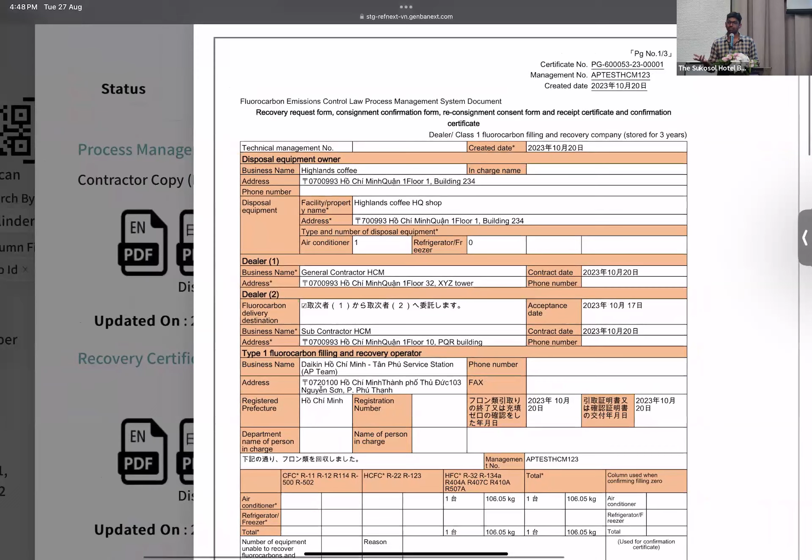This is a certificate that corresponds to the refrigerant law that dates back 20 years in Japan. So this basically outlines what information needs to be reported to the customer, to the contractor, and ultimately to the government. So basically, the Ministry of Environment had really concrete and detailed data going back 20 years. So like Kato-san also mentioned, people are struggling with documents, papers.

So by March, the guy who had to calculate would have this pile of paperwork on his desk. I've heard companies say that they work for 3 months, after March, April and May, basically collating all of this data into an Excel sheet to upload it to the government website.

So we have completely eliminated that 3 months of work for corporations, right? So these are certain reports that are auto-generated. You can see the language support. This is supported in Vietnamese as well.

So basically, what is it that we are actually doing? You can see here, we have already classified the equipment based on the use case. For example, we are tracking commercial ACs, refrigerator freezers, and others, which include car ACs and home air conditioners, because home air conditioners do not come under the refrigerant law in Japan. This could be a different case in other countries where they may include home ACs into the main law. So then that would have its own section.

So basically, this level of data granularity will help countries to automatically pull data from a platform like RefNEXT and plug it into their IPCC, UNFCCC reporting. Now, for each equipment in detail, we are tracking what is the total recovery volume. We have the equipment details, right? I mean, you have your brand.

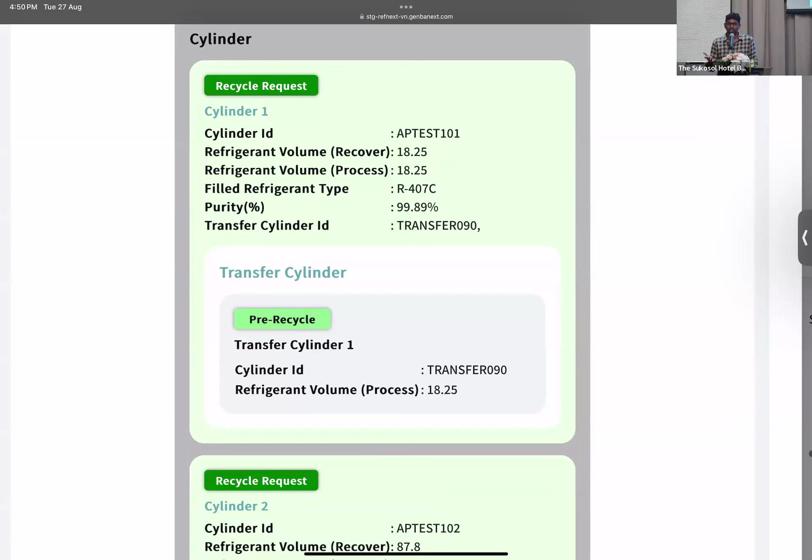But then, this helps you to understand, okay, this particular transportation route or this particular contractor has some issues where there is a refrigerant loss between the recovery up till the reclamation. So all of these are minute, intricate things which we get to see or know only when this level of depth of a system is in place.

And so now, if you have a contractor who's doing jobs in 6 prefectures, that guy now has to file 6 reports, which is kind of crazy if you think about it. They don't want to be spending that time, right? Instead of spending a couple of days there, if he would be doing 2 more jobs, he would be earning more money. That's how the business runs, right?

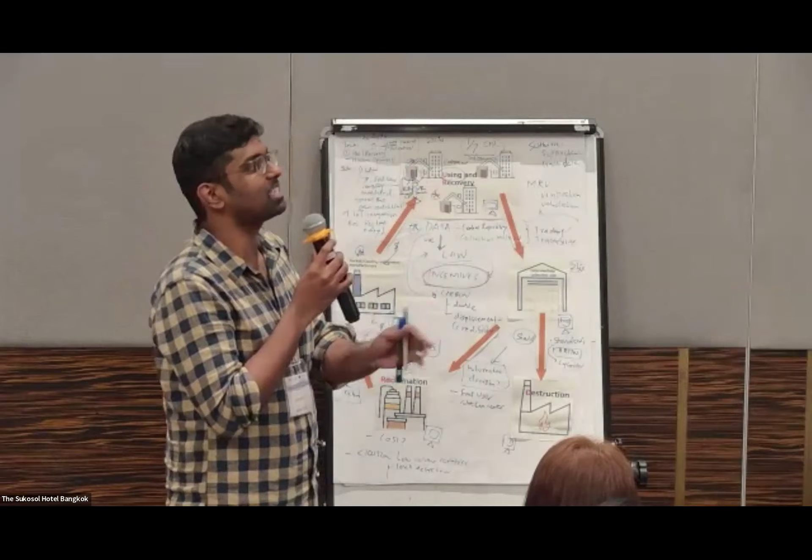However, towards the end, the conversation shifted. Even through today, we spoke a lot about technologies and what issues different countries are facing, but the discussion did not go so much towards the business modeling side. Where exactly are the merit points for the stakeholders to willingly participate in this whole scheme? From a business perspective, when we do the recovery, as per the Japanese law, contractors can earn money because the customer pays them.

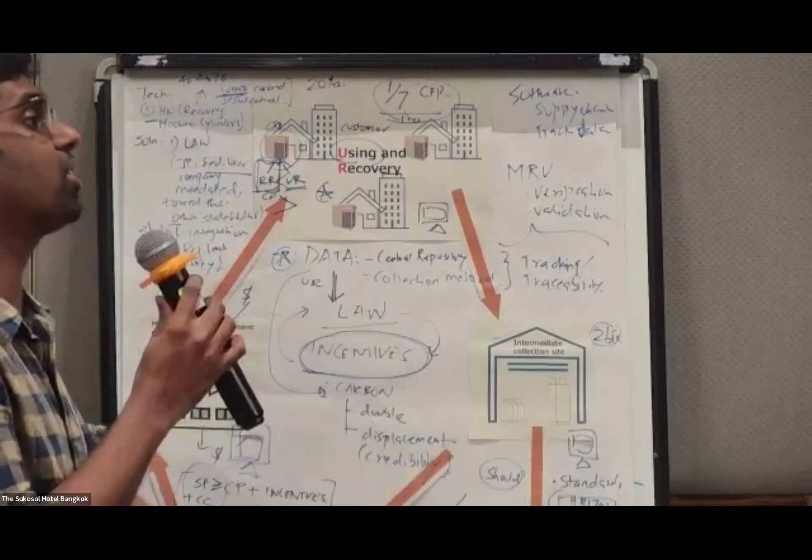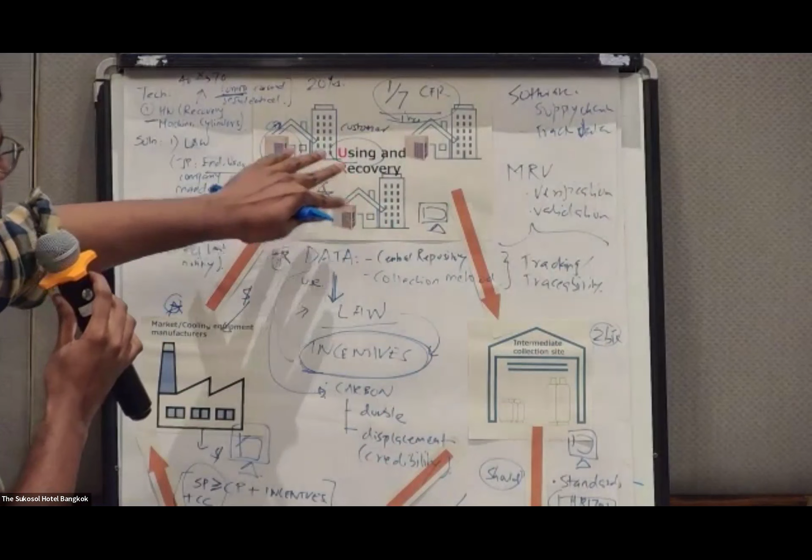However, in other countries, it's the exact opposite. You have to buy back the refrigerant from the customers. Then there is another issue of ownership transfer, because when you talk about carbon credits, that becomes a very critical aspect: who is the owner of the refrigerant? So we were brainstorming on how much of a value proposition there is for the end user, that is, the customer.

Can we include the customer into this whole loop of stakeholders? Because so far, in the different law mandates and stakeholders that we spoke about, we have not been talking about the customer, right? I'll just very quickly tell the reason why, because obviously when we talk about large scale real estate companies, refrigerant is a very small aspect for them compared to energy usage, etc.

However, as one of the LCA studies publicized by Daikin showed, usage of reclaimed refrigerant reduces the carbon footprint of the refrigerant amount by about 1/7. So that is a good amount of CFP reduction if they are going for building certification, etc. So when we look at big customers having a portfolio of 20, 50, or 100 buildings, this can be a reasonable amount of value.

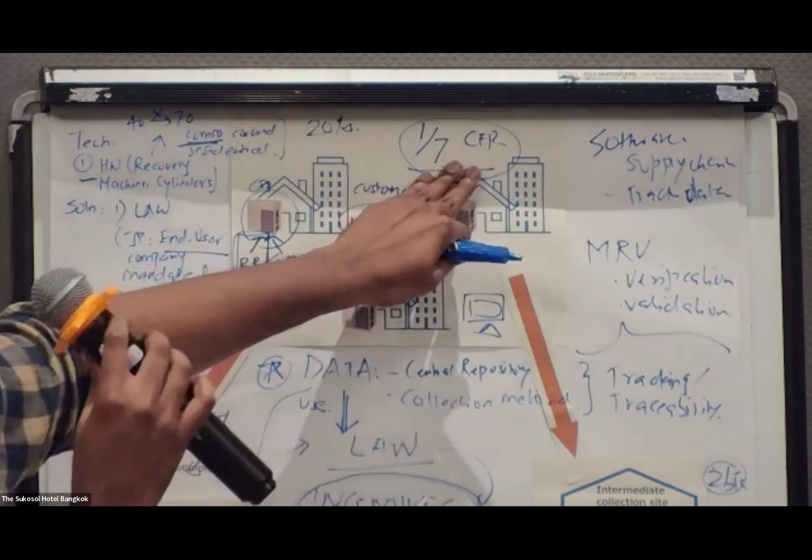So can we entice them to purchase reclaimed refrigerant at a higher cost because they are gaining some benefit from the carbon footprint reduction? But how do we evidence that, and how do we put a number on that procedure, right? This is something we just brainstormed. We obviously don't have a solution here, but I think that could be a good point for discussion. That's about it from our team.

Thank you very much. Now, next team, I hear the volunteer from group number 9. Okay. Then Yamanaka-san first. I would like to finish first. Sorry, I would like to explain what we discussed.

Our discussion was not very broad, covering the entire process. We were talking about how in Thailand there is a regulation for factories only, right? So proper management is necessary. And in Japan, all users are covered, and all users are required to implement proper management of the refrigerant.

And in Vietnam, as the Vietnamese government explained, bigger equipment is covered by Decree 6, but smaller ones are covered by Decree 08, which is about EPR, the extended producer responsibility. The smaller ones are also covered by WEEE, which is not for the refrigerant, but for recycling all the equipment.

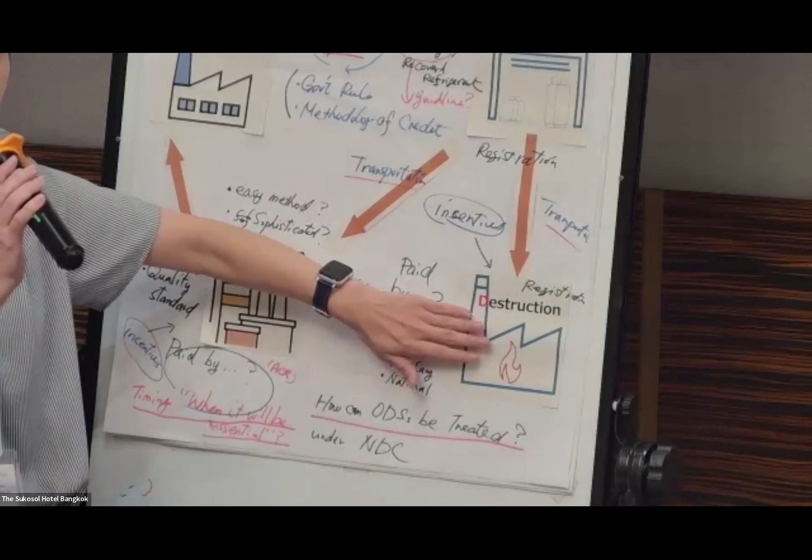And for the destruction side, destruction needs expertise and special facilities. Is it a good idea to have such a destruction facility in all countries, even small markets? It's questionable. It is not economically feasible, and it's very difficult to sustain a destruction facility for smaller markets. So there should be some way to send the refrigerant for destruction outside of that small country to other countries capable of destroying it. There is no good answer, but we'd like to identify that as the question to answer.

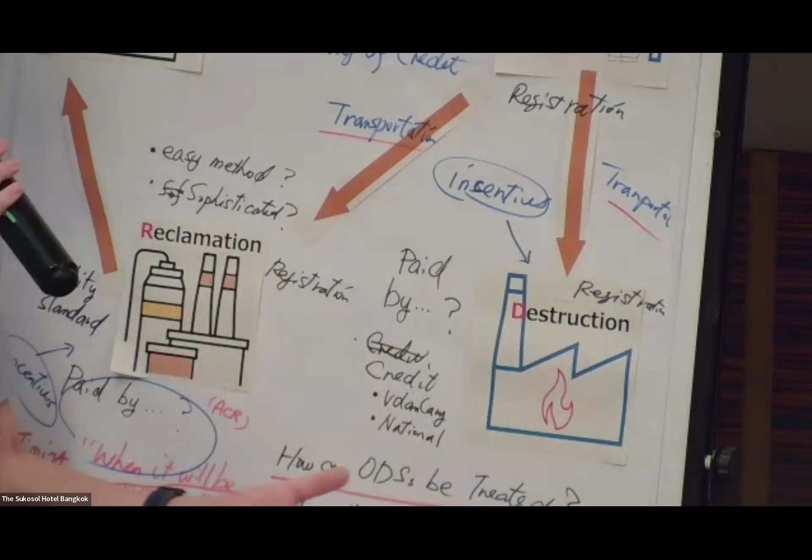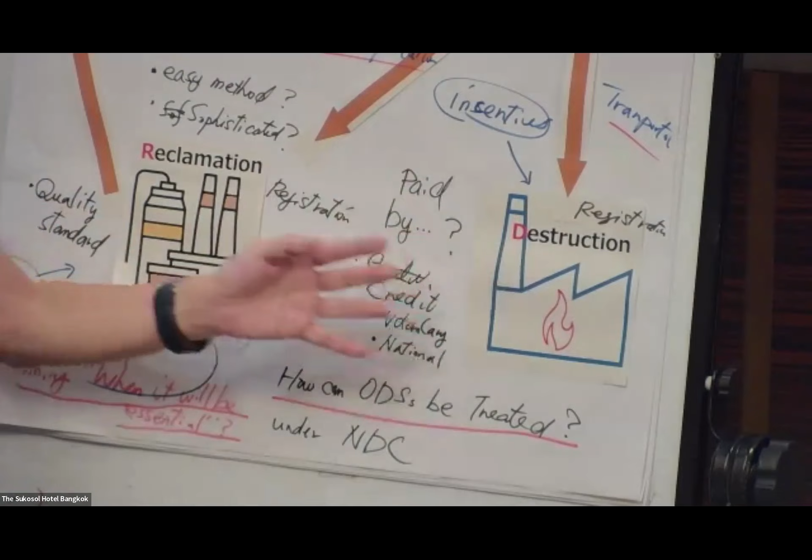For destruction, maybe carbon credit can cover the cost of the entire scheme. It may not cover 100%, but it can be a good source of cost coverage. However, if that is the case, people tend to send the refrigerant to destruction only to get the money, even though the refrigerant could be reclaimed and reused. We need to identify why we need reclaimed refrigerant, so we have to think about how to create demand for it.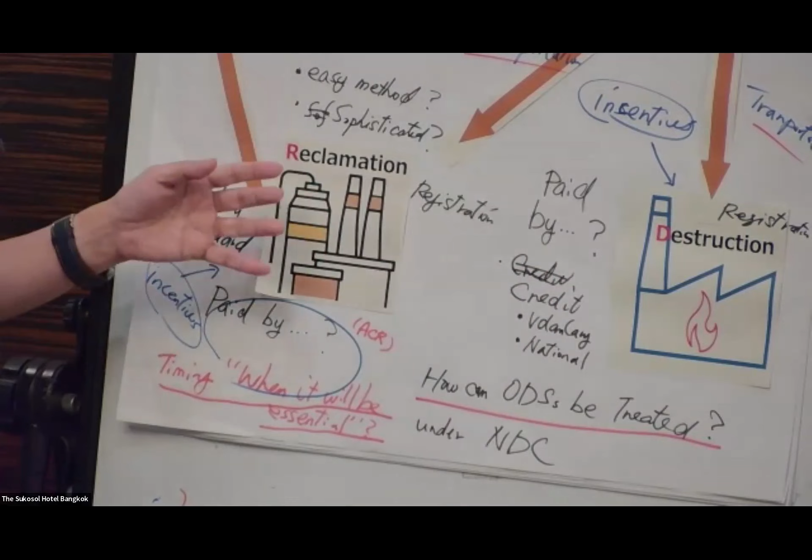Some of the governments said that currently the virgin refrigerant price is really low, so there is no need or no value for reclaimed refrigerant. So we need to find out how to increase the value of reclaimed refrigerant. Maybe carbon credit could be the way, but it seems to be difficult at this moment.

Maybe we should ask the government to mandate the use of reclaimed refrigerant in some way. But it may be difficult for the manufacturers. We are from manufacturing side, so it's kind of difficult. But all those we have to think about.

Due to the Kigali Amendment, in the end reclaimed refrigerant demand will increase anyway. But until then, how can we sustain the reclamation site? That is the important part. I'm sorry we cannot come up with answers for all the questions, but we tried to identify what we should tackle. That is the end of it.

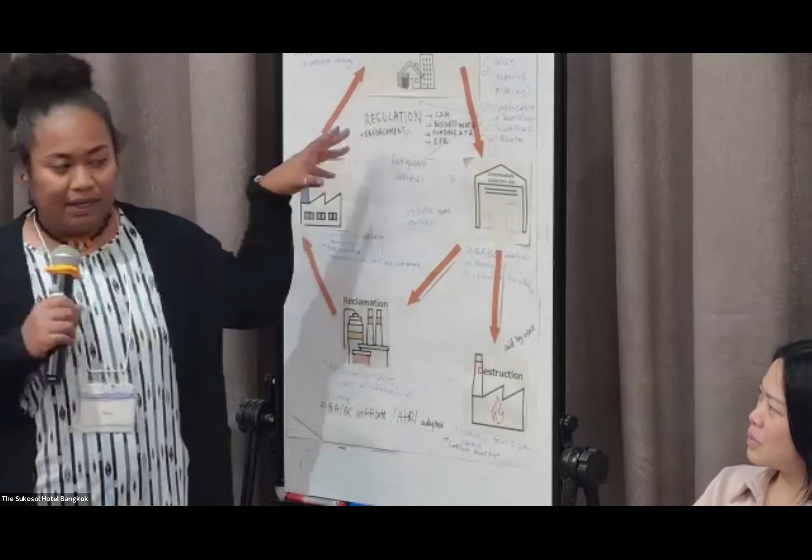For ours, at first we identified what needs would fall under all the categories. One of the main things is regulation for the life cycle of refrigerant management. Under that there's going to be business models, funding, and technical assistance, covering the whole life cycle management of the refrigerant.

The regulation and policies for the life cycle will be tailored specific to their country, because not all countries have the same capabilities. For using and recovery, we identified recovery machines, pump down for split AC, policies and incentives, certification of technicians, guidelines, and quotas.

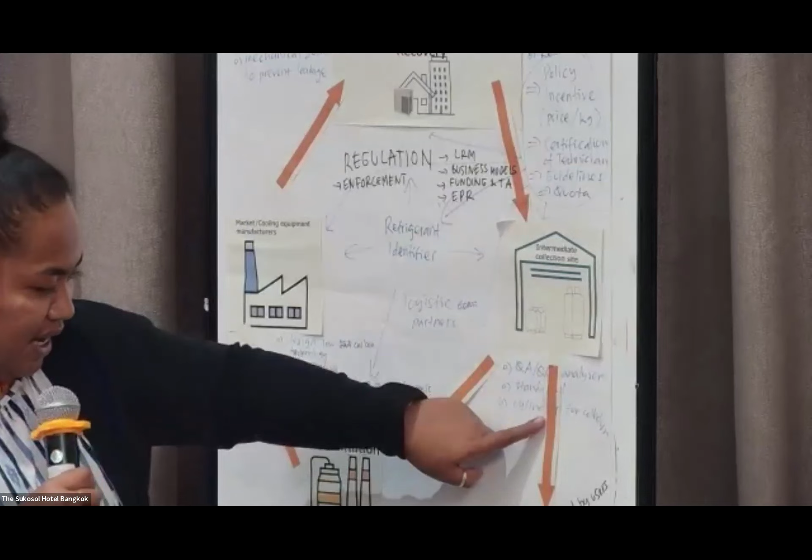For intermediate collection sites, we have QA/QC analyzer and standard cylinders for collection. From the intermediate collection site, we go to destruction, paid for by the users - that's who covers the cost. And specific tech specs for permit and carbon market.

From the intermediate collection site, it goes to reclamation as well. Under reclamation we have a reclamation facility, cylinders for reclaimed refrigerants, licensing, and QA/QC certificate under whatever standards the country decides to follow. From reclamation, we wrote our own arrow back to destruction, because sometimes they don't pass certification, so they have to be destroyed.

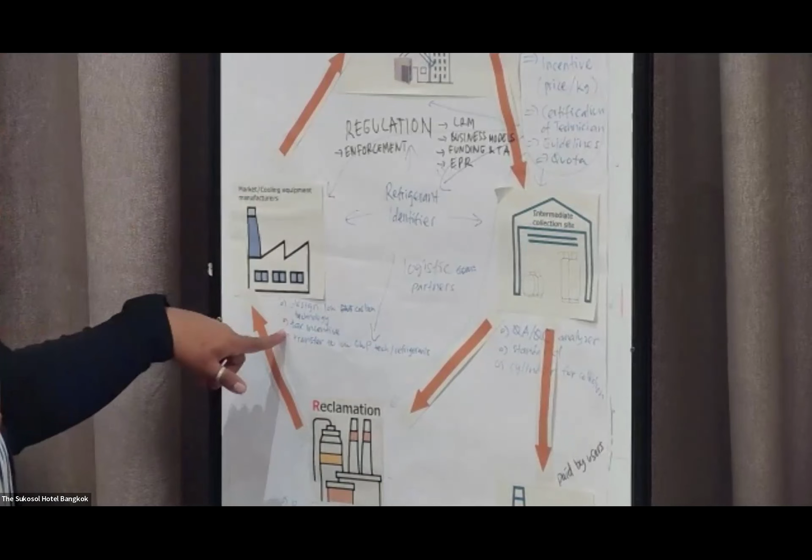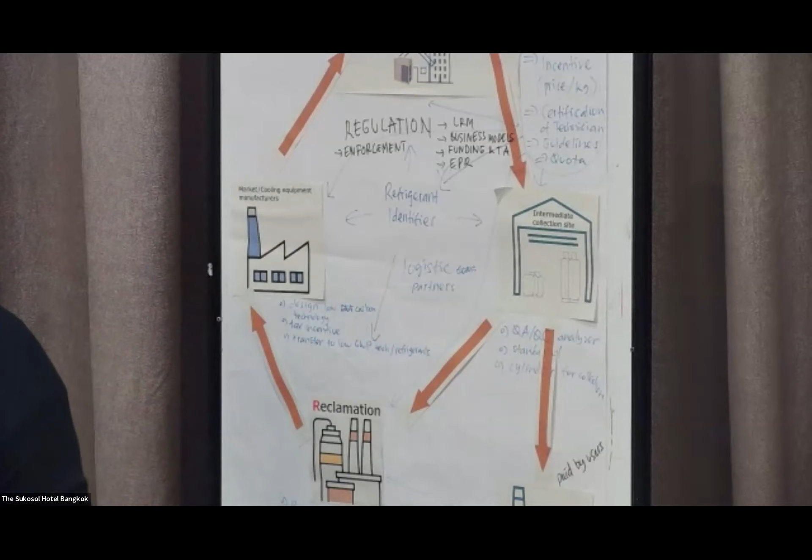From reclamation, back to the market and cooling equipment manufacturers. One of the 3 points was: design low carbon technology, have tax incentives, and transfer to low GWP tech and refrigerants. For tax incentives, people changing from another refrigerant to a low GWP technology or machinery would get a tax incentive for their purchase.

And then from that, back to using and recovery: proper installation, leak detection, mechanical joint to prevent leakage. That was all, thank you very much. We have 2 more groups.

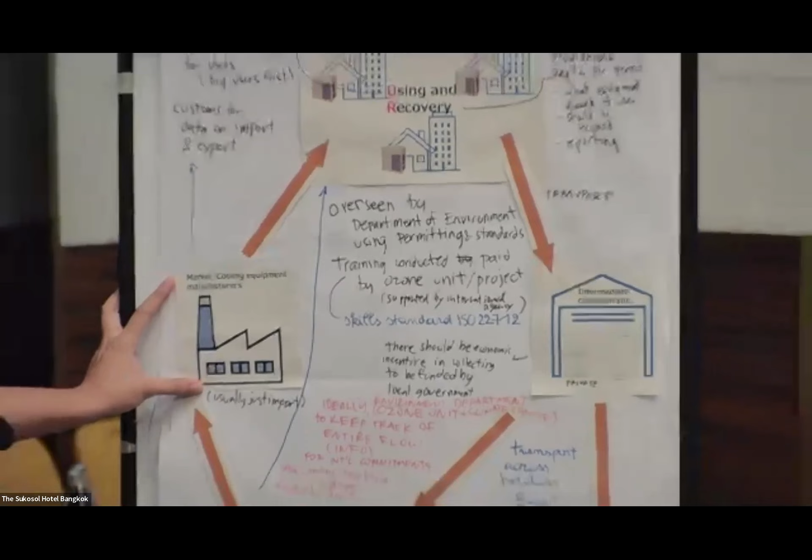One issue was how would we help the users transport their HFCs until destruction or reclamation, because they can just sell it to the black market. One idea was, actually the first idea was in Europe, they could...

So the users buy it, and then the added tax will be paid to the collection site. That was the idea earlier from Europe, but it will not work because, as said by Ms. Hild.

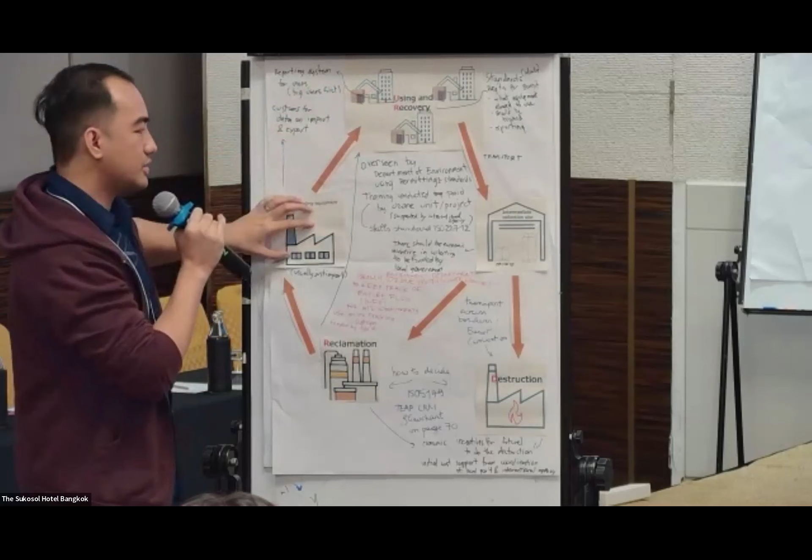So the alternative idea is, after they buy, they can give the used equipment back to the manufacturer, and the manufacturer will be the one who pays the intermediate collection site. So the arrow will go back here, then to the intermediate collection site.

Another idea is to track the flow of money. So ideally, we don't want to force, but want to motivate the users to transport their waste to the intermediate collection site.

So either we use government funds to motivate them to transport it there, or we can fund the manufacturers to motivate the users, but it's a longer arrow. So I think that's all.

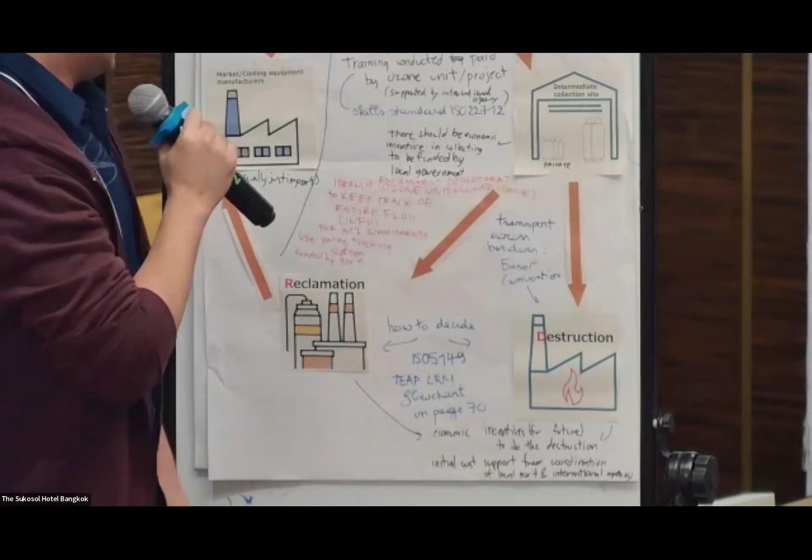For the reclamation and destruction, we also gave economic incentives to do the reclamation or destruction, and initial cost support from coordination of local government and international agencies. I think that's all. Okay, thank you very much.

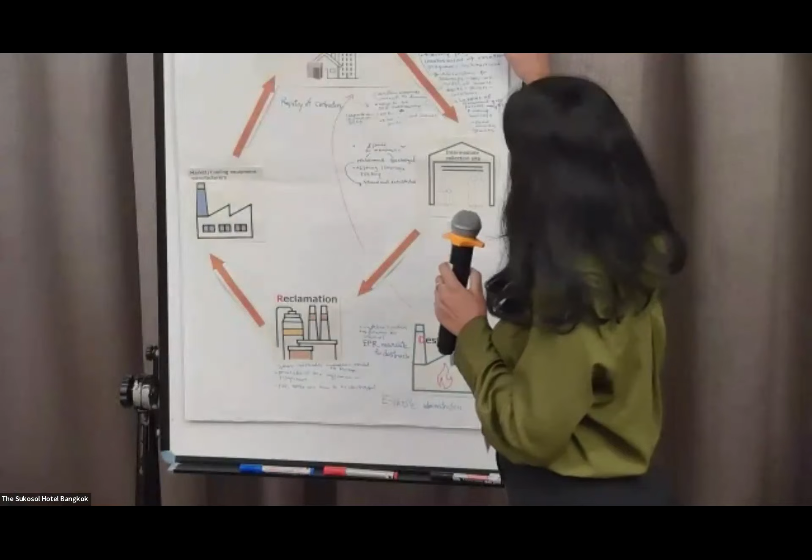So what we discussed in this group is mostly about the stage of using and recovery, refrigerant identification, and also using weighing scales to check the weight of the recovered gas.

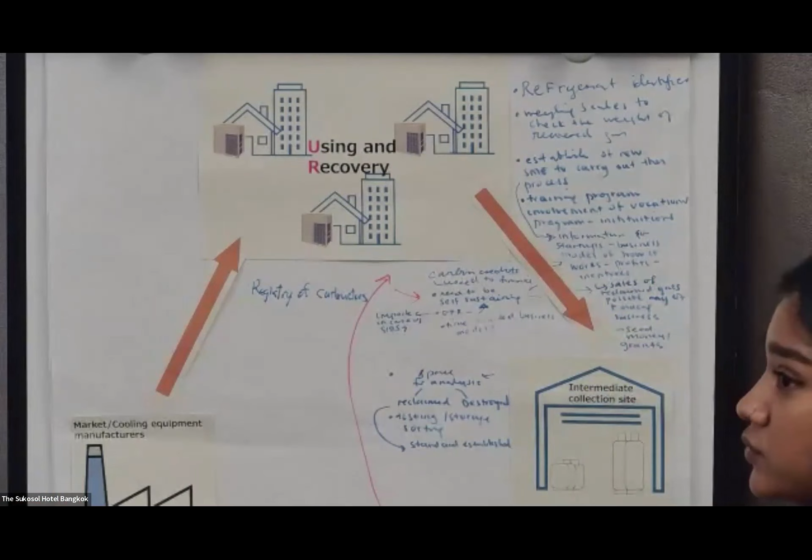And we spoke a lot about making a business out of the whole LRM. So basically establishing a business model so that more SMEs would be willing to participate and make a profit possibly out of this.

So people would need an incentive to join and carry out this process - for example training programs, involvement of vocational programs and institutions, and we could also support it by providing information for startups, a business model, and how it works with profits and incentives.

Ideally, the sales of the reclaimed gas should be financing the business. So also, more on seed money and giving grants - this does need to be self-sustaining.

That's mostly about the business aspect of it. We also discussed having an EPR policy in place, but this might be challenging, especially for lower volume countries, and also countries that do not have manufacturing in place.

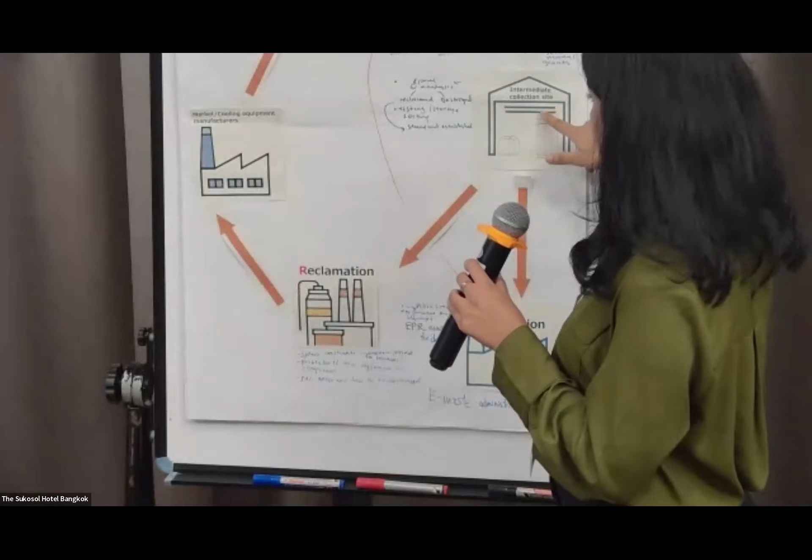In the phase of intermediate collection site, we discussed having a space for analyzing whatever gases come in, and possibly a standard established for how to identify them as well.

And for the destruction, let's go to the carbon - yeah, so the EPR policy to support the destruction as well.

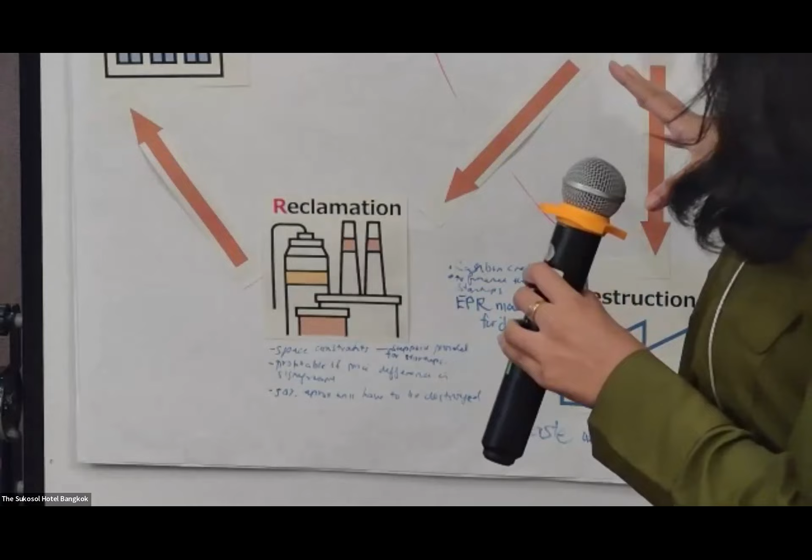In terms of reclamation, we were thinking about places which have space constraints, so also for the businesses to provide support in giving them space and equipment to carry out this reclamation. That's all, okay, thank you very much.

So now this comes to the ending part of today's session, day one. I think everybody's a bit tired, exhausted. Thank you very much for your contribution.

I see your face of exhaustedness or confusion or a bit of frustration, but I think you still get some sense of life cycle refrigerant management and the challenges existing. Also, what we have heard is there are some commonalities, or maybe minimum requirements, a common framework, but also different approaches by different countries.

So this is another thing we can highlight. Today, the purpose of this discussion is not to bring us to the perfect answer, but rather to unpack the complexity of life cycle refrigerant management - we can still identify different pieces, different elements we should tackle. So that is actually the purpose of the discussion. Sorry for getting you so tired, but I think I was very successful in putting you in.